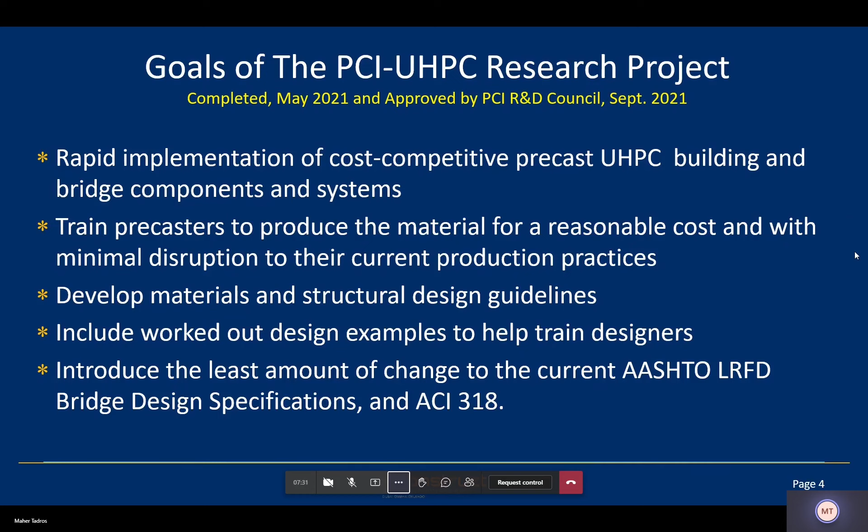We wanted to develop materials and structural design guides for people who want to mix their own UHPC and design with it. The report includes worked out design examples to help train the designers. The whole idea is to introduce the least amount of change to existing codes, whether it's AASHTO, ACI, or in your case, the Canadian codes.

So what is PCI UHPC? We identified it with compressive strength and what we call tensile properties. Compressive strength at service is 120 MPa. At pre-stress release, because our focus is on pre-tension members, at release of the pre-tensioning force it's 70 MPa. We recommend this, especially for bridges, but we don't insist on it. It's not a requirement; the requirement is to define our UHPC as 120 MPa at service strength.

For tensile properties, we go a little bit further because that's the most important set of properties. Tensile, not compression. Compression is easy to talk about because that's what you're used to doing. Tensile properties are the most important, and they are important because we have fibers in the mix.

So minimum, all based on the bending test for ASTM, with a minimum cracking stress of 10 MPa, minimum peak stress of 14 MPa, and then we have strain hardening to make sure that once the specimen cracks, the stress continues to go up, the load continues to go up. That's strain hardening.

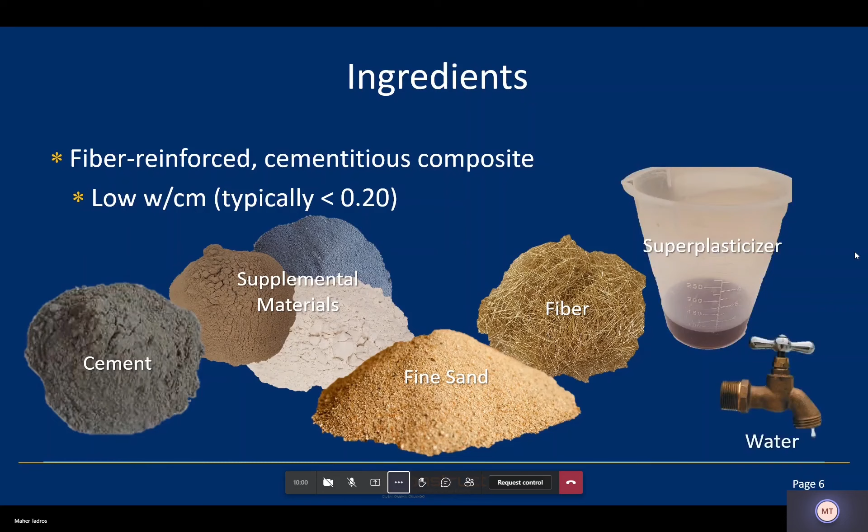We use fibers. We don't insist on the very fine 0.2 millimeter by 12 millimeter or 20 millimeter, very tiny microfibers that are black steel but coated with brass. If somebody has other fibers that will give us the properties, they can use them. Of course, the chemicals that are needed to make it flowable, and good, clean tap water.

Split cylinder test has existed. And then there is a new testing program called double punch test that I think started in Spain, and Florida DOT is interested in, and others are interested.

So the reason we chose the flexural prism test is that there is a standard for it. Everybody knows how to test a prism in flexure.

Here, it's a little bit more complicated because we need to get a load deflection diagram, not just load, not just the peak load. But it is something that people can use with their compression machines or some form of compression machine and test. And that's very important. It needs to be simple and it needs to have a standard.

The direct tension test, Dr. Graybeal has been trying for years now to get it introduced to ASTM, and he has been turned down. And now he has taken the route of trying to get a standard approved by FHWA or by AASHTO, and that is in process.

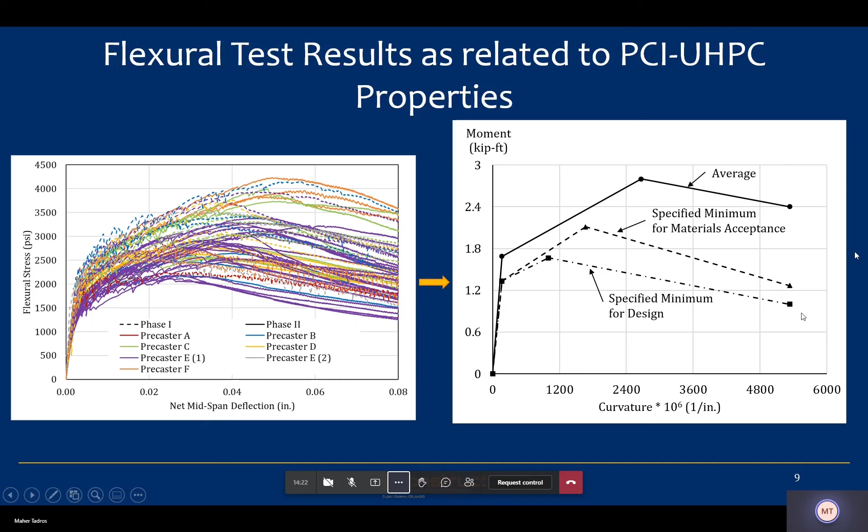The good news is that the average is relatively high of these tests. The minimum specified standard is what we use to accept the material as meeting the PCI UHPC requirements. And in design, we go even further than that, and we use the cracking stress, 10 MPa, and 14 MPa as the maximum that we can allow in design, and then the ductility, which doesn't enter into our design, but it's required.

So people will say, how do I be sure that my material that I'm mixing in my plant is satisfactory? What we're basically using is the ACI, and I am sure that the Canadian code has something similar, and that's to mix a number of tests and to create averages and standard deviations, and based on the number of tests, you decide what you would design your mix for.

Now, this is the important one, because that's what you do on a project by project basis. Acceptance testing has to be simple, and it has to be within the means of the precaster or the precaster's testing lab nearby. You cannot ship it to a university 200 kilometers away and expect convenient results, because sometimes you need to do the prism testing in 1 day, 3 days, 4 days. So it needs to be convenient and readily available.

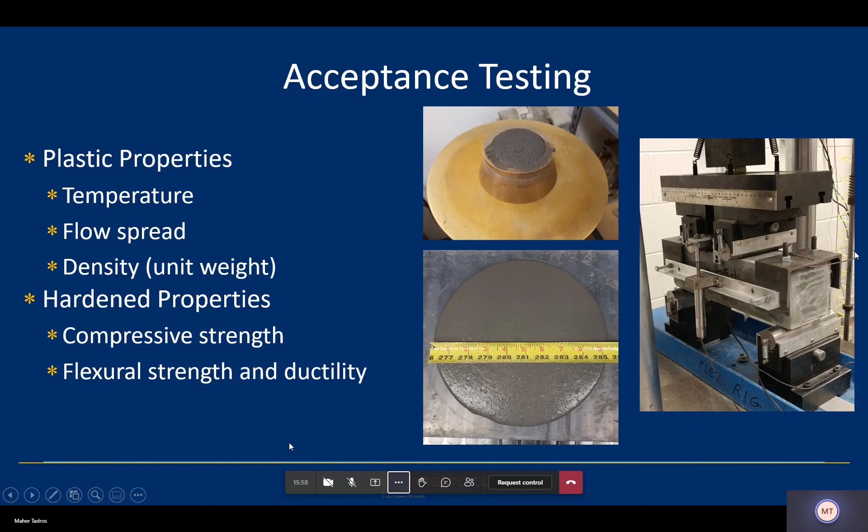So the picture on the right is the prism test. That's probably the most difficult of all. There's also a cylinder test, very simple and convenient, but you have to grind the ends to get good results. And for the fresh concrete, we have to have a flowable mix. If we don't have a flowable mix, we would have trouble filling the molds.

So the goals for production: it has to be practical to implement, it has to be cost competitive, and the precasters will need to tell us what works for them. We did develop guidelines in the report, but a lot of the precasters have their own way of placing the concrete, and we need to be open-minded and responsive to their expertise and their needs.

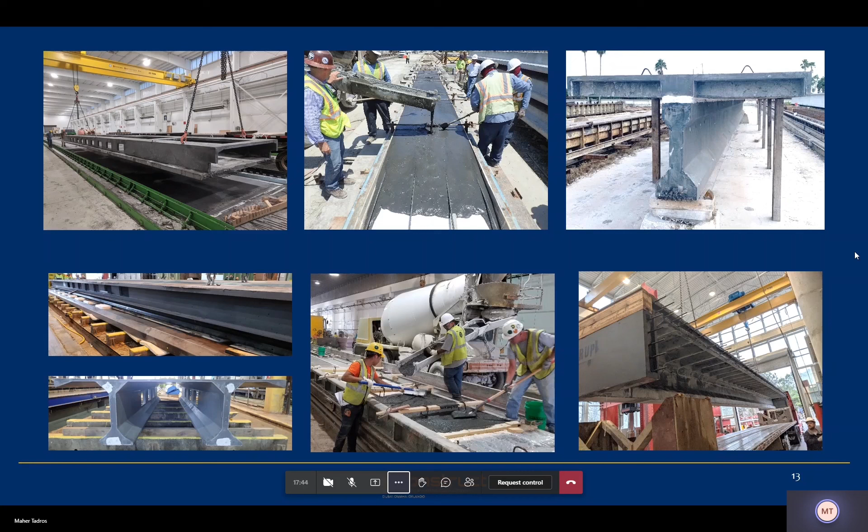The one on the top right is a composite of UHPC I-beam with UHPC deck, ribbed slab deck. The bottom left is a variation of the one on the top left. The middle is a variation of the one on the top. And the bottom right one is my favorite, because that was made by FACA in Toronto, near Toronto, and shipped to NC State University, North Carolina State University for testing. It's a full-scale test, and I'll talk some more about it.

Okay, this is my message. We cannot have cost-competitive UHPC without structural optimization. So this is a great time for structural engineers. Most of the work that has been done around the world ignored that second half of the package. Everybody is focusing on how to mix and how to get the highest possible strength. But unless you know how to use it in a real structure, then you're missing the rest of the story. So structural optimization is the key.

In our mind, we have 3 criteria for structural optimization: it has to be simple, it has to be conservative, and it has to be cost competitive - and I mean cost competitive on a first cost basis. These are very hefty goals, but we strived very much to try to achieve them, especially when we talk about conservative and cost competitive, there's a clash there. Some people say you cannot have all three conditions - pick two. No, we're picking all three.

And I'm sure just about everybody knows Steve Jobs and Sir Richard Branson. Both have the same message. Steve Jobs was a little bit more tactful and diplomatic in telling people that you start with something, it starts out very complicated, but you keep working on it and you can peel off the onion until you get a very elegant solution. Richard Branson is saying you're stupid if you don't do a simple design. My message is that simple is hard. A lot of people can come up with differential equations and very, very complicated solutions. I think that's kind of hiding the real simple solution that everybody should strive for.

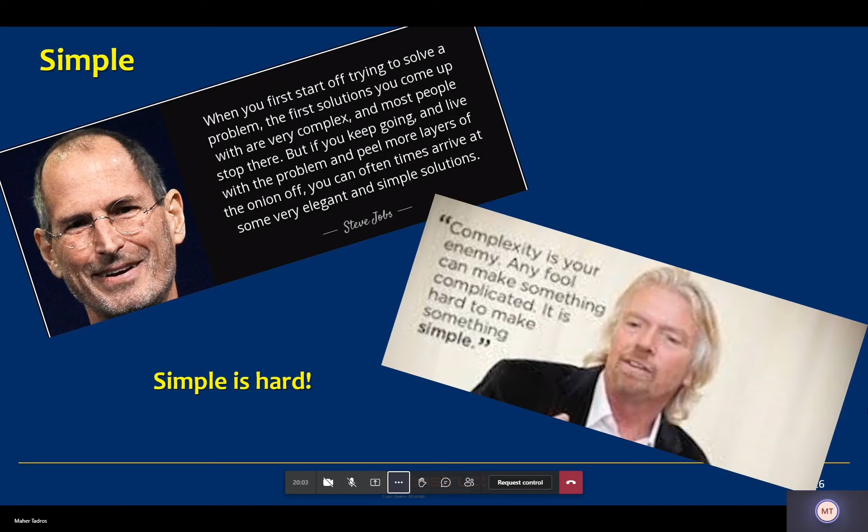So cost effective - we don't want to have a cost-effective cross-section shape. Take the I-beam, reduce the web width, and say that's going to be my optimization. That will never work. You need to take a bridge or a building and find where you can introduce UHPC in the most suitable, convenient way.

For example, in the state of Minnesota, they use cast-in-place haunch post-tension slabs. I don't know about Ontario or other provinces in Canada, but the cast-in-place haunch post-tension slabs in Minnesota and Kansas are quite popular. You need to take that whole bridge deck and replace it with a 550 millimeter precast UHPC box slab.

It will give you the deck immediately. It will not be interrupting the population around the bridge. It's good for accelerated bridge construction. So that's on a first cost basis, and that's what we should, unfortunately, all try to do.

Because we all do the bidding and the lowest bidder gets the job. But there are also a lot of bonuses, a lot of additional benefits. A study in Australia shows that the expected life is more like 340 years instead of 75 years. It's good for the environment because you use lower volumes of materials. It reduces shipping costs, it reduces foundation costs. And it is safe because sometimes you have a longer span without shoring.

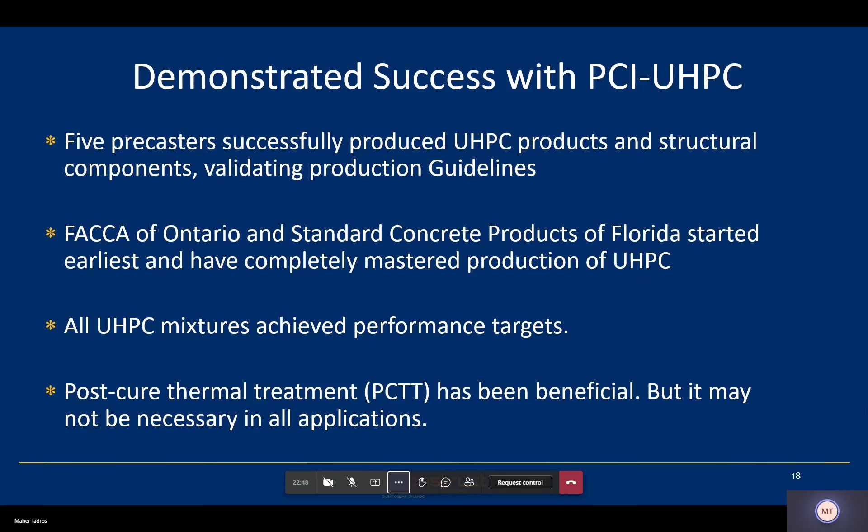So as engineers, the design is simpler, the detailing is simpler, the precaster benefits the same way. Although the base price of the material is high, there are additional benefits.

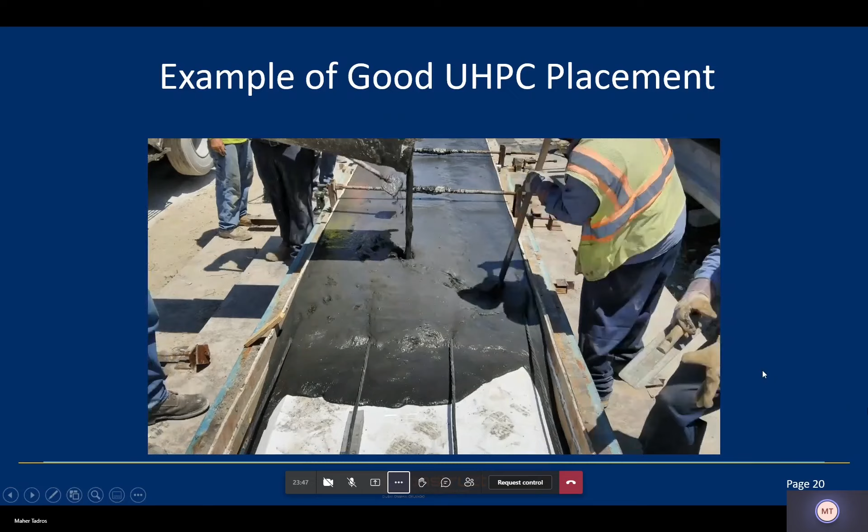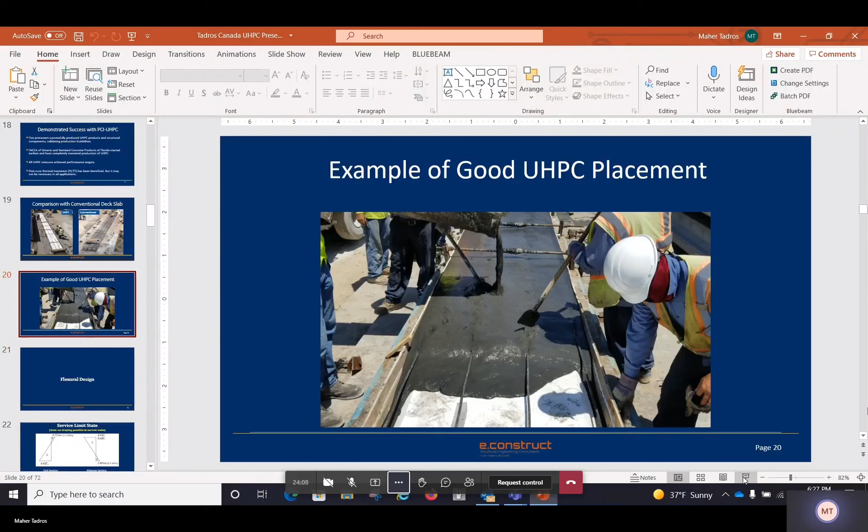I'm going to show this slide that gives you the flowability of the mix. I did it too quick. As you could tell here, it is very flowable.

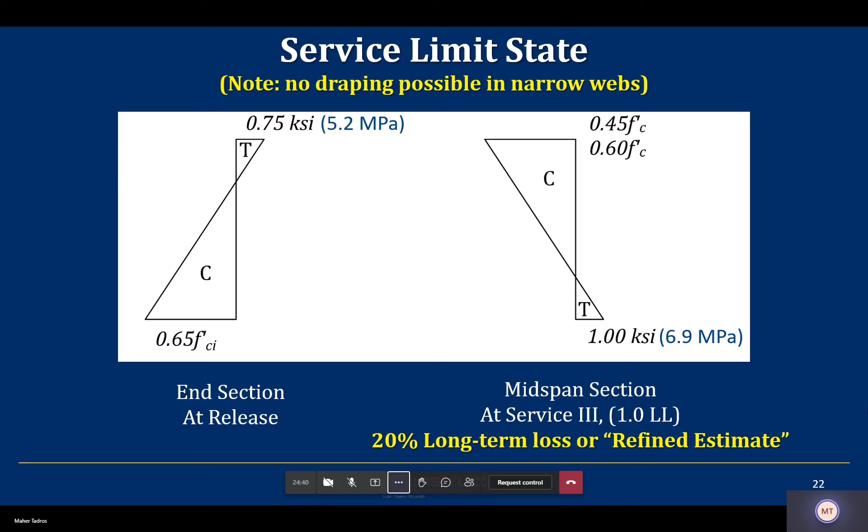Now we talk about flexural design. Everybody knows how to do service limit state, no issue. You need to use the creep and shrinkage coefficients for this material, determine pre-stress loss, and calculate using MY over I. No issues.

Flexural strength is a little bit more complicated. I will first talk about flexural strength with fibers, and I'll talk about what happens if you ignore fibers. If you have pre-stressing in a pre-stressed member, the main tension element is actually the strands, not the fibers. So the strain diagram follows plane sections remain plane. The stress diagram before cracking is straight lines, triangles. After the product cracks, the strain climbs up.

You still have a triangle for compression, but then you have a triangle for tension just a little bit. Then it becomes uniform all the way down to what we set as the acceptable ultimate strain in tension, which is 5,000 microstrains. Beyond that, the section still works, but we're not going to give credit to the fibers for any tensile capacity. This diagram, stage 2, is probably the one that's used the most until you get to the very end, when the strain at the top is 0.003, or for you in Canada, 0.0035.

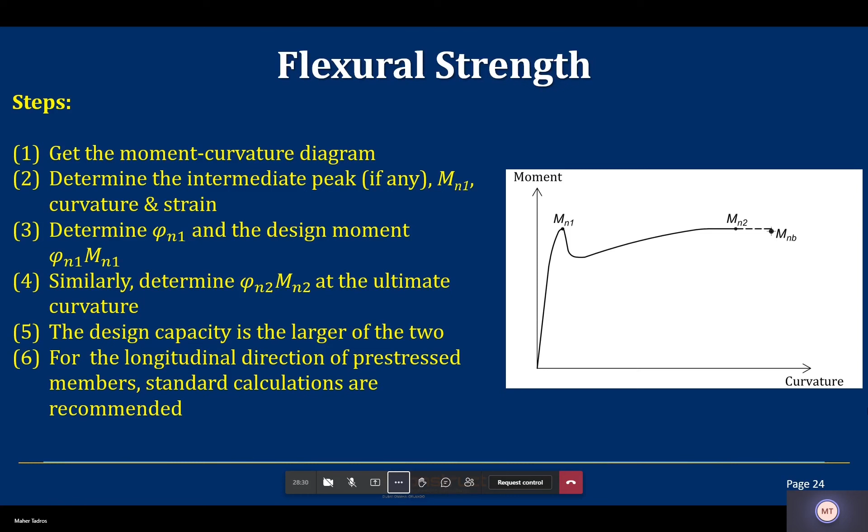But item number 6 here, for the longitudinal direction of pre-stressed members, which is the most important check, you can ignore the fibers, meaning you can use whatever computer program you have at this time. Let's take an example.

Now, close to 0.005, but the trick here is that he thinks you cannot go beyond this, which is the maximum strain in tension for the concrete with fibers. To me, that's a severe restriction, because when you do this, the stress in the strand is even less than the yield point. So in all of the work we've been doing for 50 or 60 years, we will never achieve the ultimate strength of the strand, which to me appears to be a waste.

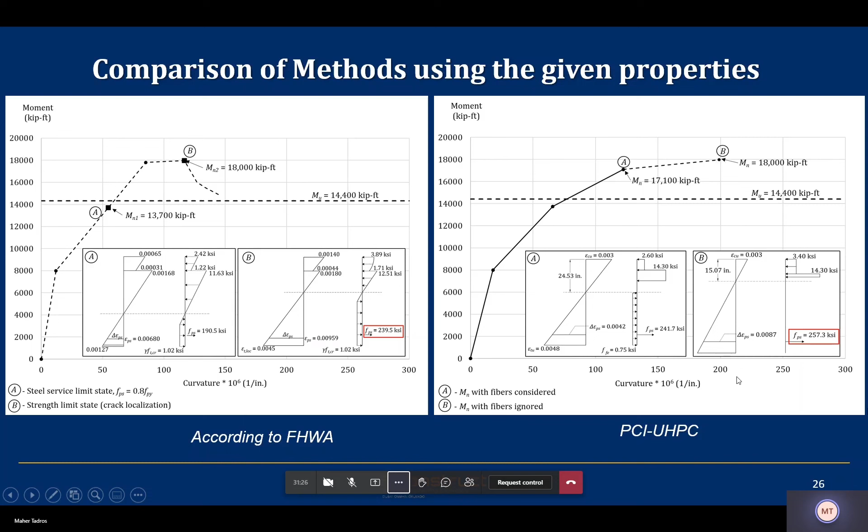So as a summary, this is a very important slide. If you use the FHWA recommendations, use the dashed line, and it drops - I don't know how it drops. It kind of doesn't make any sense.

If you use the PCI recommendations with the strands he has, which are 0.7-inch strands, it still continues to go up until ultimate, and it gives you about the same peak, but at a later curvature, later strain, and it's not needed. So if you take the whole section, and instead of 0.7-inch strands, you reduce it to 0.6-inch strands, from 17.8 millimeters to 15.2 millimeters, you still get the capacity you need - that's 2/3 of the pre-stress required for the section.

I would say thank God for FACCA. They approached us even before the PCI project started - that's how progressive they have been. They said, we want to have a modified NU beam, what can you choose for us? And they created a project, and we came up with what we call the decked I-beam.

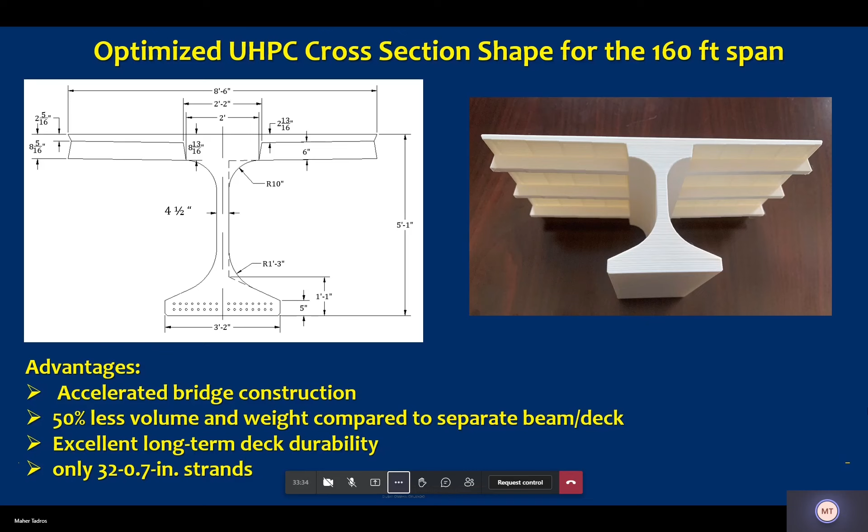So if you take the example run by FHWA, and run it again using the PCI method, and run the same loads one-third the time using the PCI UHPC with the decked I-beam, you can tell here you only need 32 strands, you need zero stirrups, and it's very fast construction. So you save a lot on concrete, you save a lot on strand, you simplify production, and that's how you get the cost effectiveness. So we've done a whole bunch of tests using products.

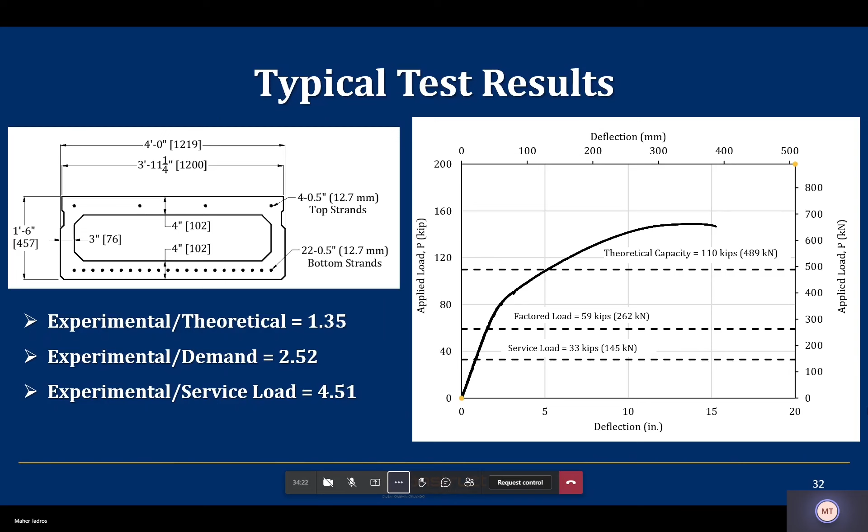And in all of the tests, we far exceeded the design capacity.

Very quickly here, development lengths, we're piggybacking on what Dr. Graybeal developed, which is a transfer length of 20 strand diameters, development length of 40 strand diameters. Bars, 8 to 10 bar diameters.

For vertical shear, we're sold on what Canada does, we're sold on what AASHTO does, thanks to Mike Collins and his associates at University of Toronto. He led the way back in the 90s, and we're very glad for that.

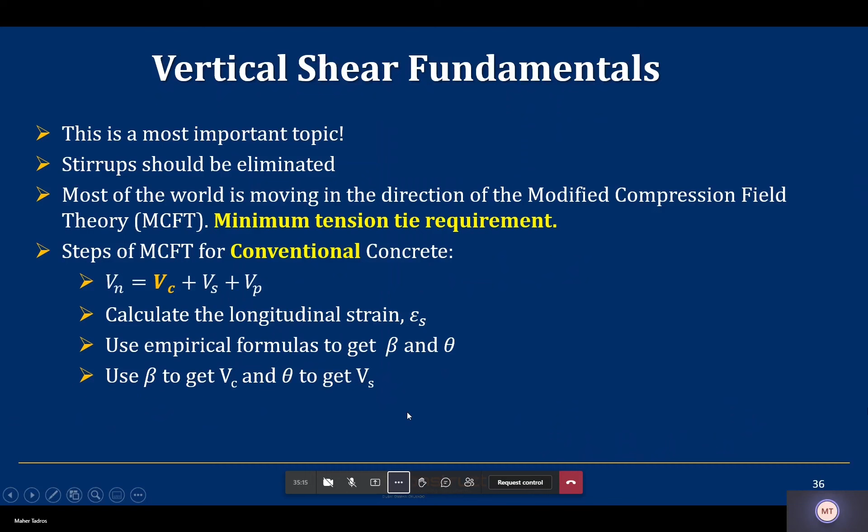So for conventional concrete, you just get the strain, the flexural strain, and from it you calculate beta and theta values that are used to calculate V sub C and V sub S. If you're doing UHPC, all the change you make is take VC out and replace it with VCF, representing concrete mixed with fibers. Because of the minimum properties we have, this comes to 1 KSI or 7 MPa. Very, very simple: 1 KSI times bV times dV cotangent theta. That's all you need.

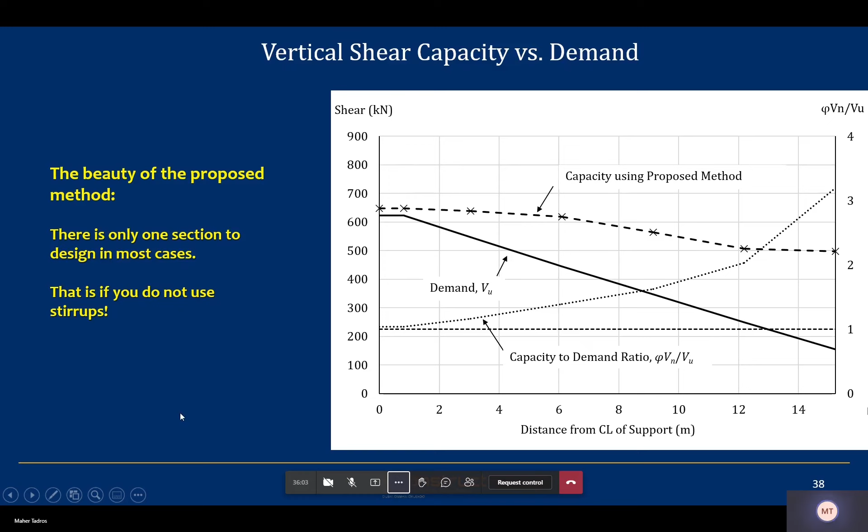Again, one good benefit of using UHPC: if you don't use stirrups, you only check one section, because the capacity is closest to the demand only at the end, and then they spread out after that. If you don't have stirrups, then that's all you check, and that's all you detail - no stirrups.

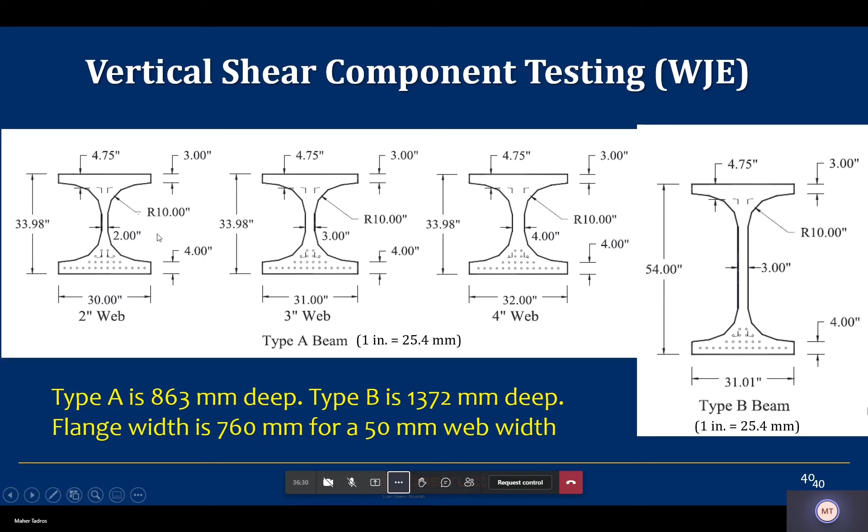And it's very important that we insist on the tension tie needed to make this system work. We tested a whole bunch of specimens in shear. WJE tested what we call coupon tests or component tests using I-beams that we designed specifically for the project. You can tell we have very large fillets, and we like that because we like the concrete to flow through.

We also tested a whole bunch of products, including the FACCA I-beam at NC State University and some building products, as you can see here. In all cases, you will see a whole lot of cracks, and then finally one crack dominates.

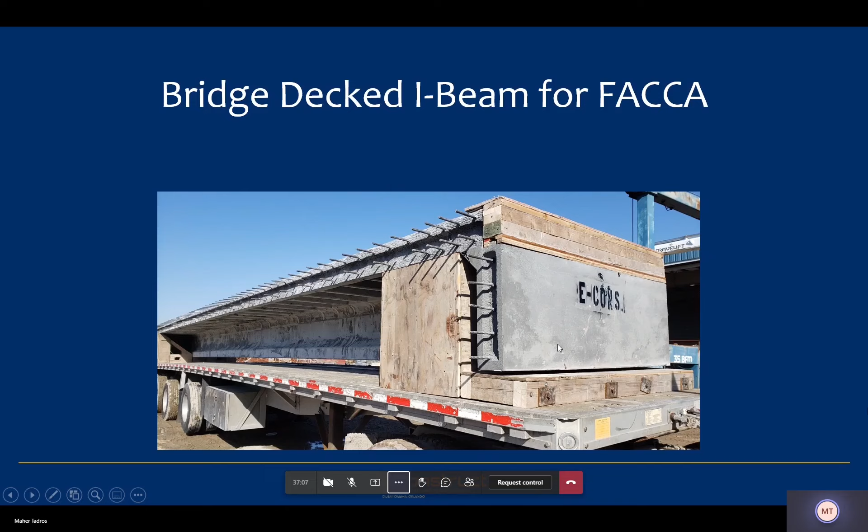This is the FACCA decked I-beam. They labeled one end as Econstruct - that's the company, my company name. That's the end that has no stirrups. The other one has stirrups, I believe, as per Ontario Ministry of Transport requirements.

So the one that had - the one that had, I'm sorry, go ahead Philip. The one that had, go ahead. No, it's not me, somebody else.

Okay, the one that had stirrups did give high capacity, relatively high capacity, but at near ultimate there were vertical cracks that reflected the locations of the stirrups. So the stirrups disrupted the flow of the fibers. And if we have no stirrups, we still have very high capacity, so I don't know if there is a justification for putting the stirrups. I would rather make the web wider and get rid of the stirrups than make the web narrower and impose putting stirrups there.

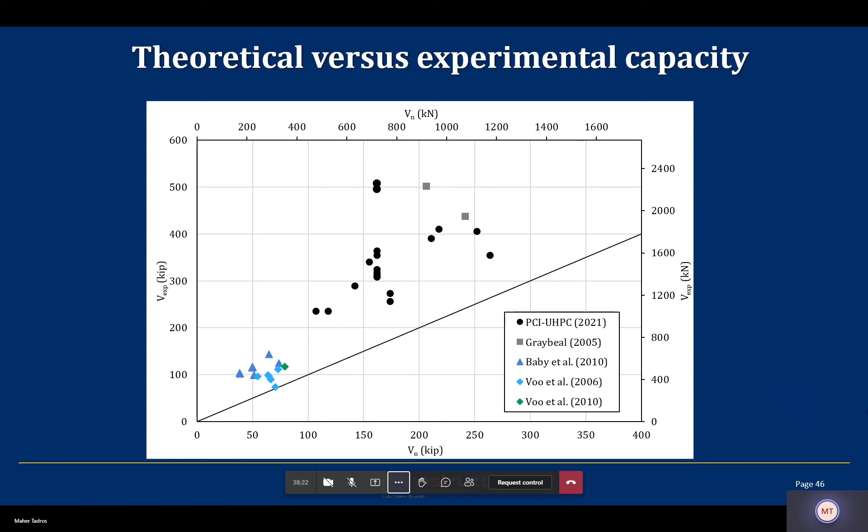This picture still gives you the experimental capacity versus the theoretical capacity, and in all cases we are quite a bit higher. Actually, we have a very large margin of safety in addition to the load factors.

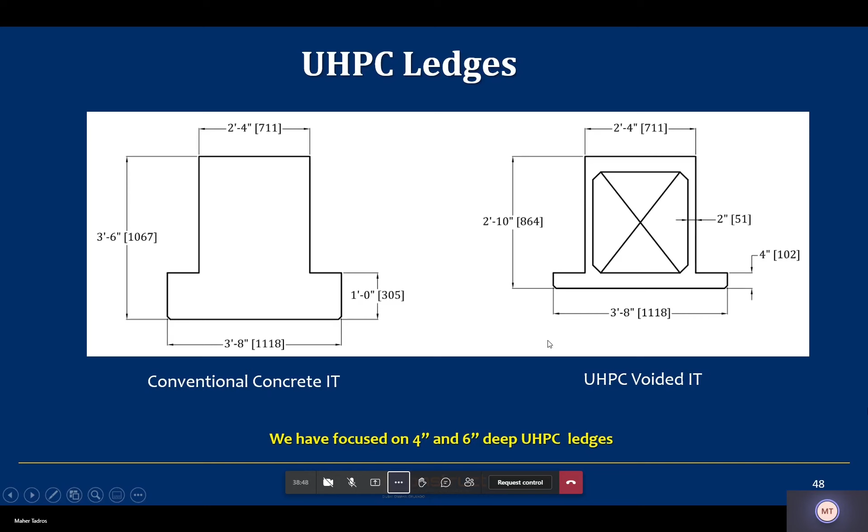We also tackled pre-stress loss, interface shear, punching shear, corbels and ledges, end zone bursting stresses, reinforcement creep and shrinkage, camber, and deflection. This gives you an idea about an inverted T that's very popular in buildings and how it can be converted to UHPC - very amazing, very interesting. And we did full-scale testing, and we're very confident in our recommendations.

And that's all in the report. For applications, obviously a lot of people would love to see architectural UHPC, and that's moving forward.

Again, coming back, decked I-beam - I am sold on that. Either the decked I-beam or the box slab are very, very efficient products to use.

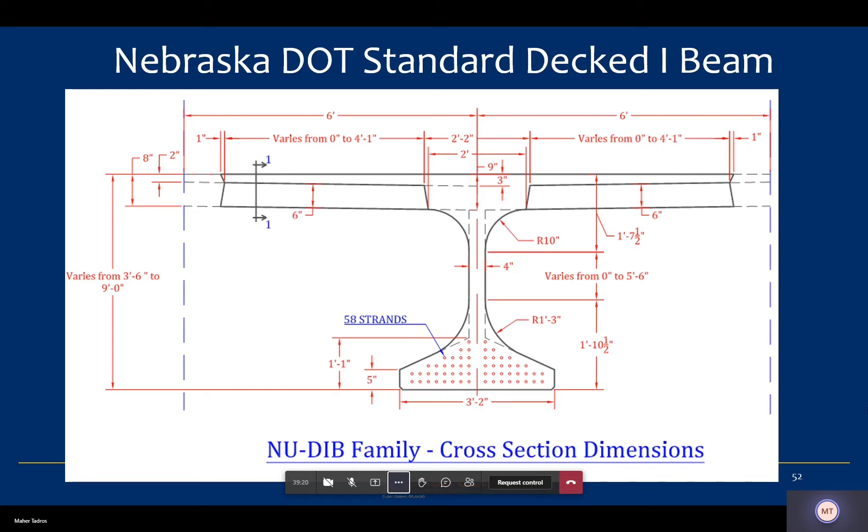We're also doing sheet piling under contract with Florida DOT. This is supposed to be a 1 foot, 12-inch, 300 millimeter solid sheet pile. We're changing it to a U-shape.

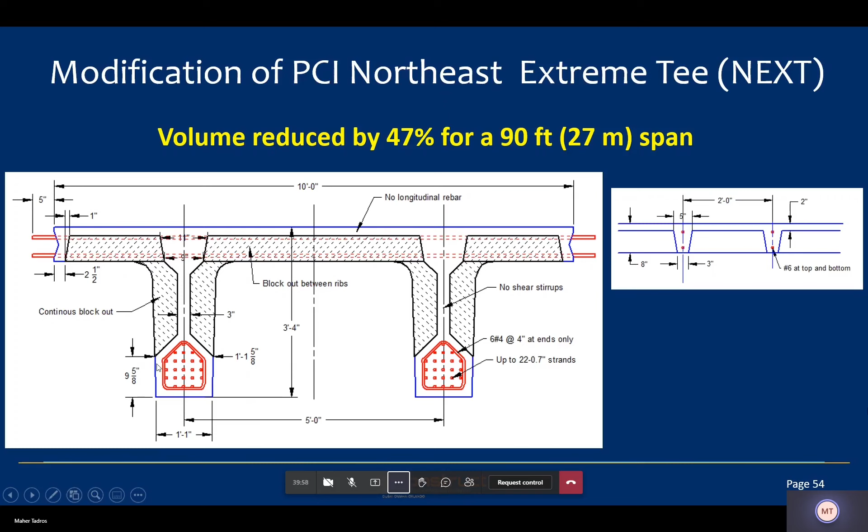We published in Aspire magazine an idea of converting the popular Next beam - for Northeast Extreme T - to a much more efficient UHPC, again with zero reinforcement except confinement at the end and bars in the transverse direction. This product is also excellent, and it's good for shallow structural depths. If you're replacing a 4-span steel bridge with a 2-span overpass at the same depth, you can do this and get away with it.

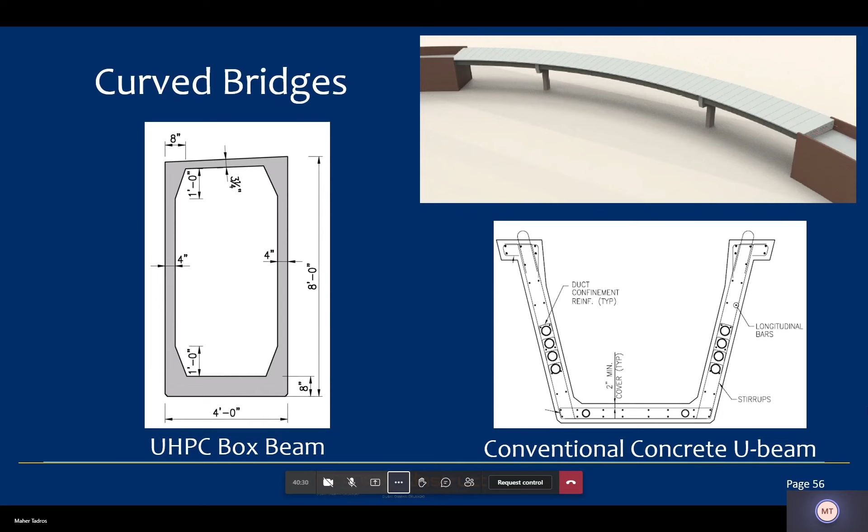We're also working on curved bridges, and in the PCI journal, in the March-April issue, look for a paper on that represents a concept using UHPC for curved bridges. Piling - it could be an I shape, it could be an octagonal shape with a void inside, formed with cardboard.

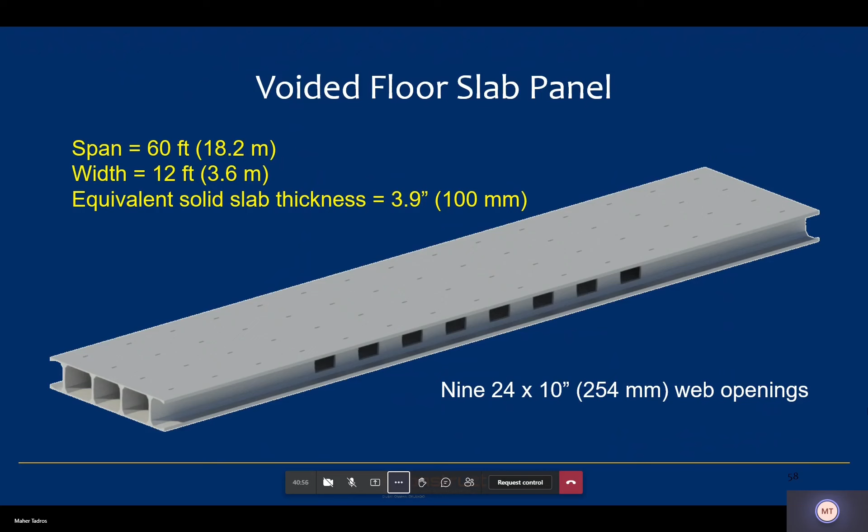Voided slab for residential construction, you can span 20 meters, 60 to 70 feet easily, no supports. Excellent if you have parking underneath. This project is ongoing, production is on the way.

We converted a steel framing system at the top with a column in the middle, 36-foot span, to a clear span of 72 feet, with voids in the beam. So you can pass utilities and create all kinds of options. We replaced all this steel framing with hollow core sitting on a box beam. And that's how the box beam looks.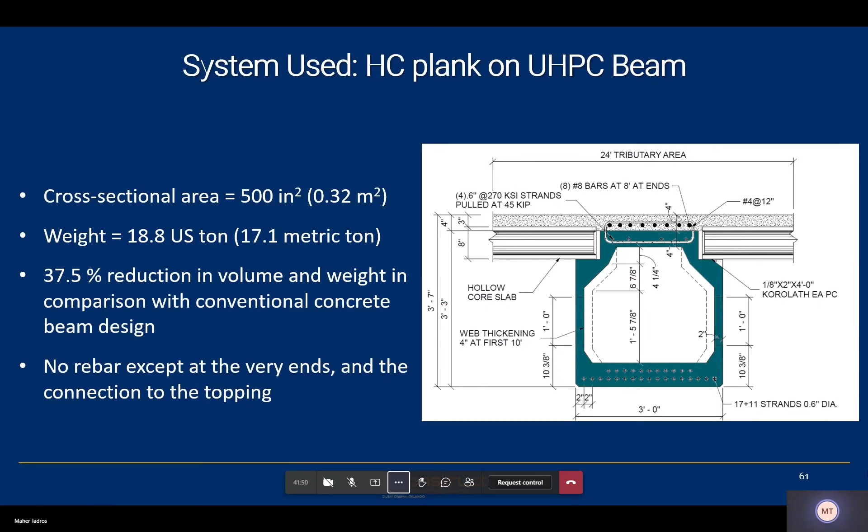Saved quite a bit of materials. These beams are in production at this time. It's a 9-story building. Another example that I'll give real quick.

I don't know about Toronto, but I'm sure there are parts of Canada, because I designed some of them back in the 70s when I was in Calgary. You have condos, wood condos sitting on concrete podium floors. But at that time, I used post-tensioning.

Here, we're using precast, but you could tell it's very messy. There's a column in the middle, so cars that go in underneath would have to navigate through these columns. There's hollow core, there's rectangular beams where you have load-bearing walls, and there's an inverted T-beam. So it is quite involved. And this is the floor where you do the parking.

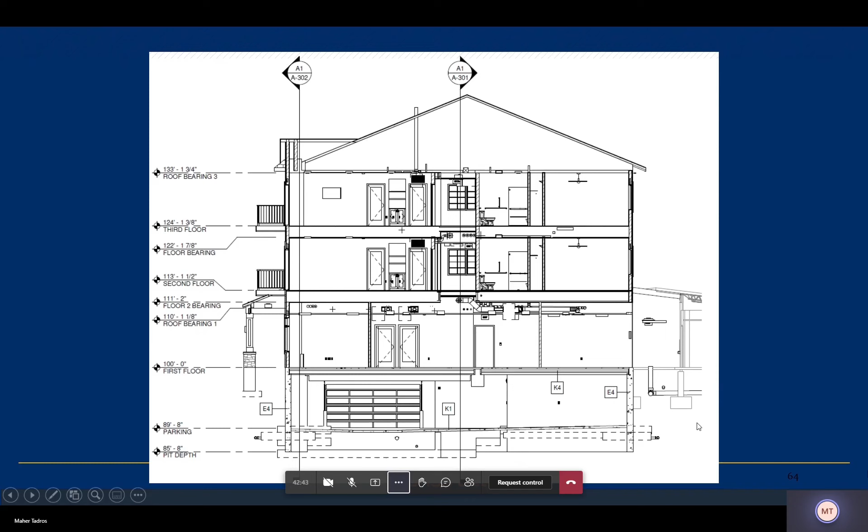And these are the products: rectangular beams, hollow core with topping, rectangular beam when you have heavy load, otherwise it's hollow core, which is cheaper. And then the inverted T supports hollow core on one side and rectangular beam on the other side.

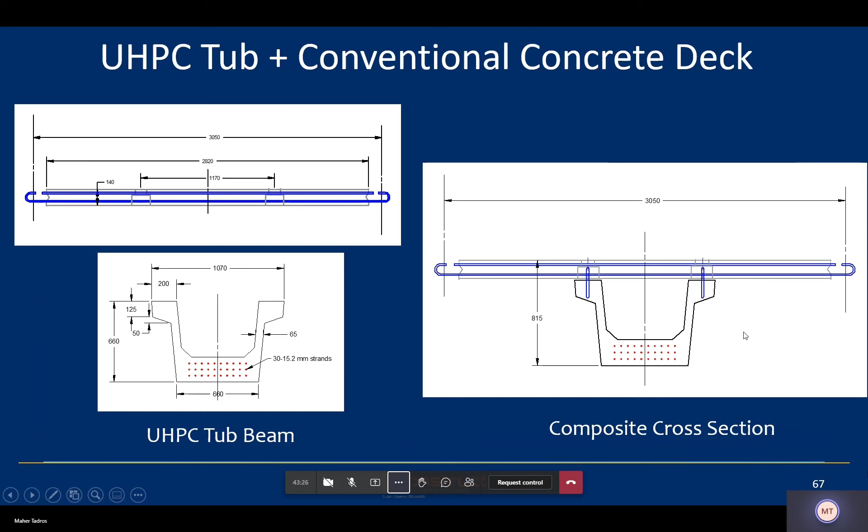We managed to change all of that with only one product that spans end to end. The product looks like this: you have a UHPC U-beam, and you have conventional concrete deck on top of it. So the UHPC is only limited to the U-beam. That's all we need. Very shallow, very attractive, and it clears spans.

So we changed from 105 pieces to only 14 pieces. That's where you get the possibility. Imagine the possibility—14 pieces, you actually save money.

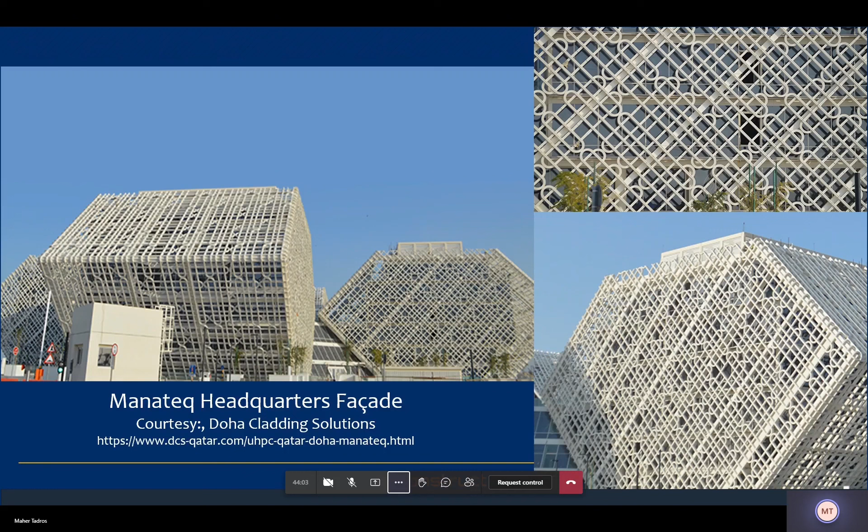Of course, everybody loves architectural applications. Our sister company in Doha is very active with architectural UHPC for cladding. This is one of their projects, and obviously another one in the United Arab Emirates. There's a lot, and I know there are some projects in Canada that are quite attractive. I believe the library in Calgary is a very attractive project.

So can we wait? Should we wait until these turkeys make up their minds as to which design method? Please, no, don't. You already have enough information to do your design and to do it efficiently. The time is now. Don't wait. And this is my presentation.

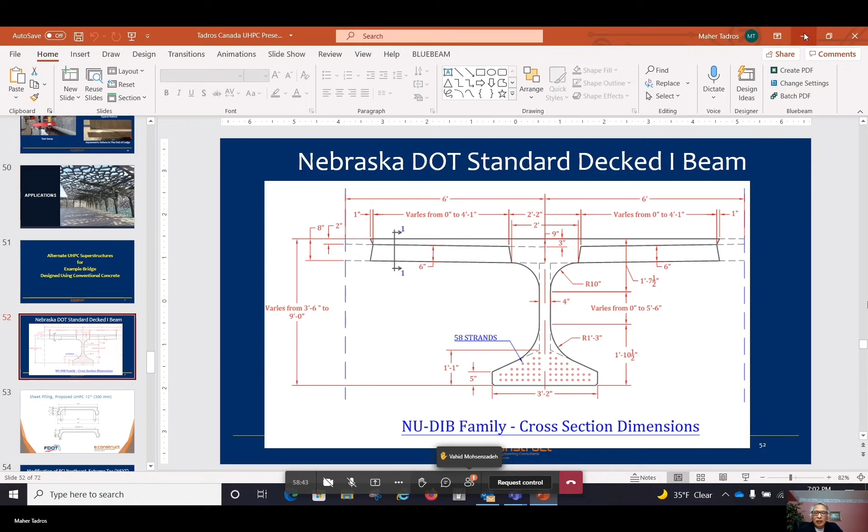Okay, I guess we are exactly on time. I would like to thank Dr. Tadros for these excellent presentations. I think in the audience we have people from clients like MTO, City of Toronto, and we will definitely consider those girders and UHPC in our structures. Thank you, Professor Tadros. Happy to help anytime - as I said before we started the meeting, I'm a Canadian. So you guys need to consider me one of you, definitely from Calgary, and colder than Toronto.

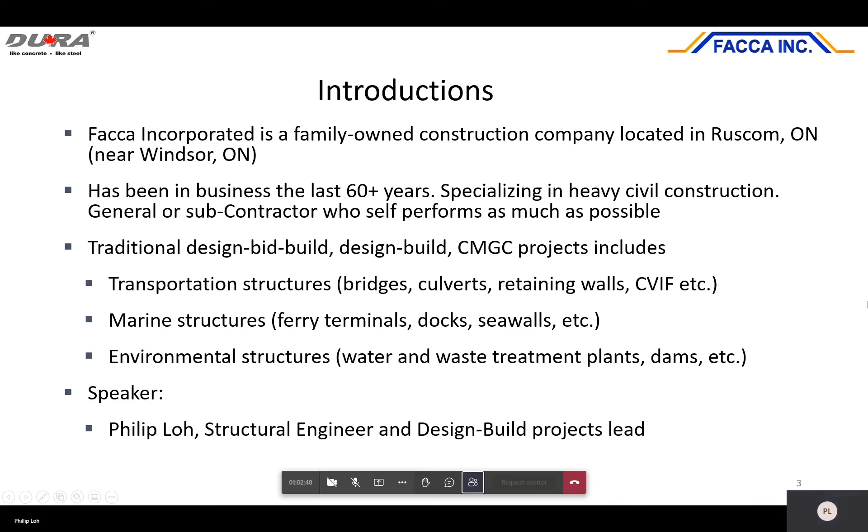Man, what happened? It doesn't want to move, right? Okay.

The Dura UHPC that we have - we formed a joint venture with Dura Malaysia to form Dura Concrete Canada, and this is a proven UHPC product. It has been used in many MTO contracts and meets CSA, MTO, and as you can see in the previous presentation, the PCI standards. So we are a precast facility, CPCI certified, and we use local Canadian and Ontario raw material as much as possible.

So the material properties for Dura - this is the CSA standard A23.1-19 material identity card. You can see the compressive strength here - the mean we tested is around 140 MPa, and the characteristic is around 130, in category 120. All the tensile strain characteristics are here.

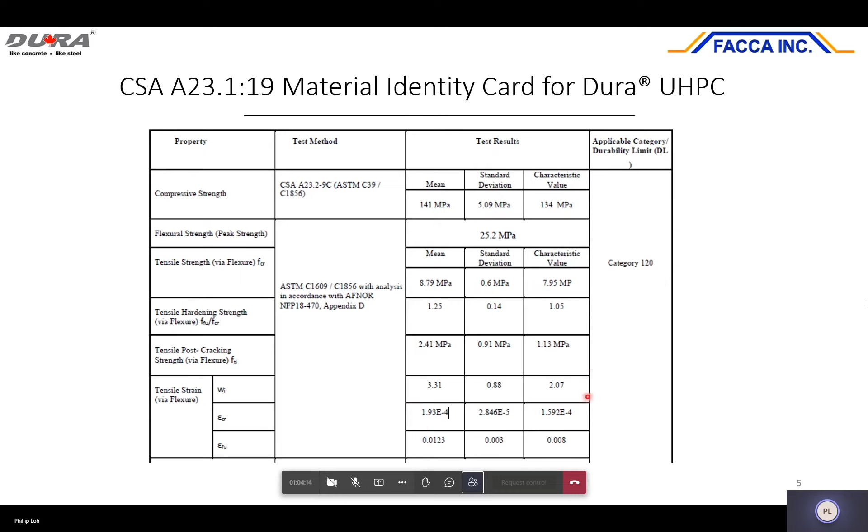Then for durability, as we mentioned, this is a very durable product, and some of the more important parameters we use is the RCP chloride ion penetration - we tested generally around 34 coulombs, which is less than 100 coulombs. Those are very, very good numbers.

So we did some testing last year for MTO for the DSM pre-qualification. Here is the mock-up sample casting - this is to simulate a closure joint between precast elements, with MTO here to witness the casting in our yard with this mock-up sample at a 2% slope.

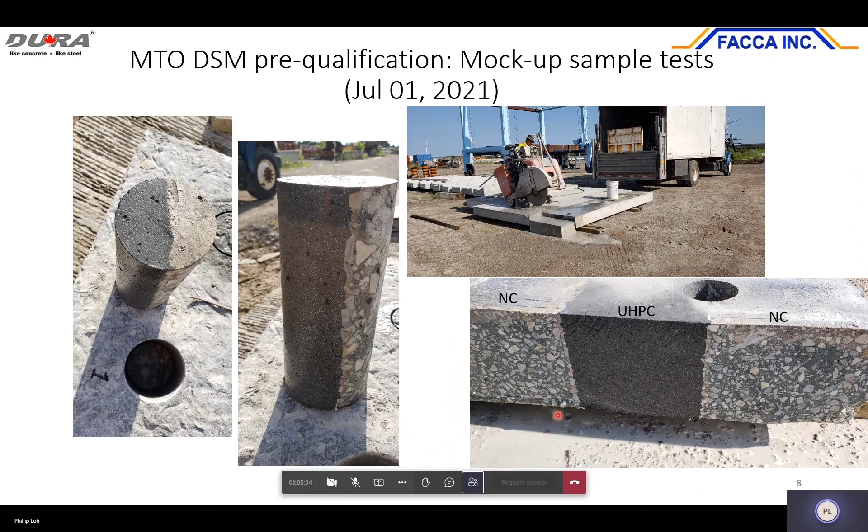Then 7 days later they came back and we did a coring through the joint. So there's a core - this is UHPC, and there's normal concrete, and the bond is just about perfect. We also saw cut through the joint, and you can see again the bond is really good.

MTO has also asked us to do a whole bunch of other tests. For DSM they have different parameters - the 28-day strength has to be 130 minimum instead of 120 according to CSA, so we ended up with 150 - they don't use characteristic strength, more the average. Then for tensile strength, again the RCP - MTO only requires less than 300, but we have very low numbers, 27. There's also linear shrinkage and freeze-thaw - 300 cycles and it's still 100%, so no change.

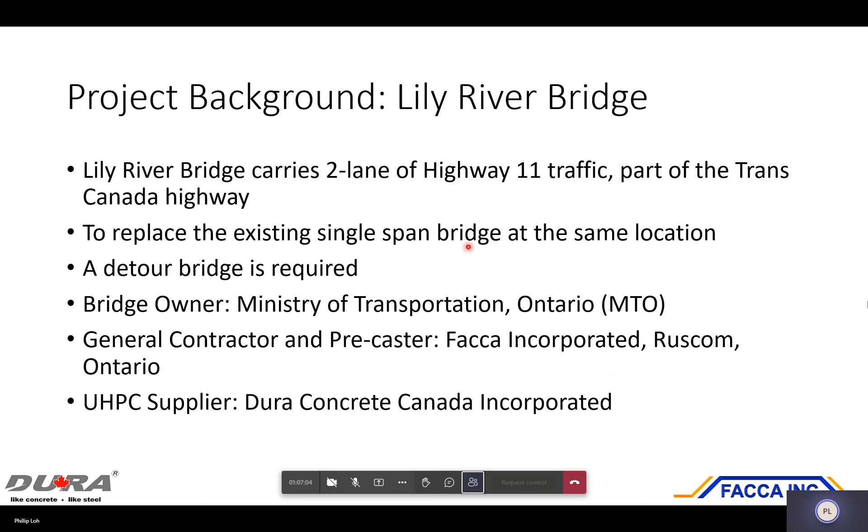The project is to replace the existing single-span bridge at the same location, and the consultant Stantec has required a detour bridge. The next slide shows the detour bridge, some distance from the existing bridge - this is toward Kapuskasing and this toward Moonbeam. This single lane detour bridge is controlled by temporary signals - it's one of those Bailey bridges.

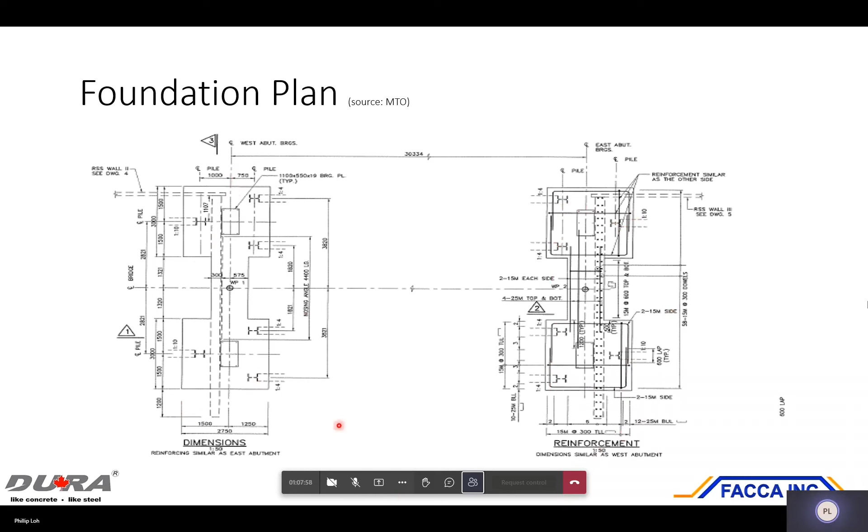For the foundation plans, we have the east abutment and west abutment. The design was 6 steel H-piles for each abutment. For one of the abutments, the west abutment, we have a change proposal to replace the steel H-piles with UHPC piles, while also maintaining the batter. We know that UHPC piles probably require fewer than 6 piles, but we decided to keep the same number of piles and keep the batter as well.

So this is the foundation design. The borehole logs here show bedrock at around 12 to 13 meters below grade. 13 meters is where the east abutment is, and 12 meters is the west abutment, which we are more interested in. It shows cobbles and boulders, so we have to fit the piles with pile driving shoes.

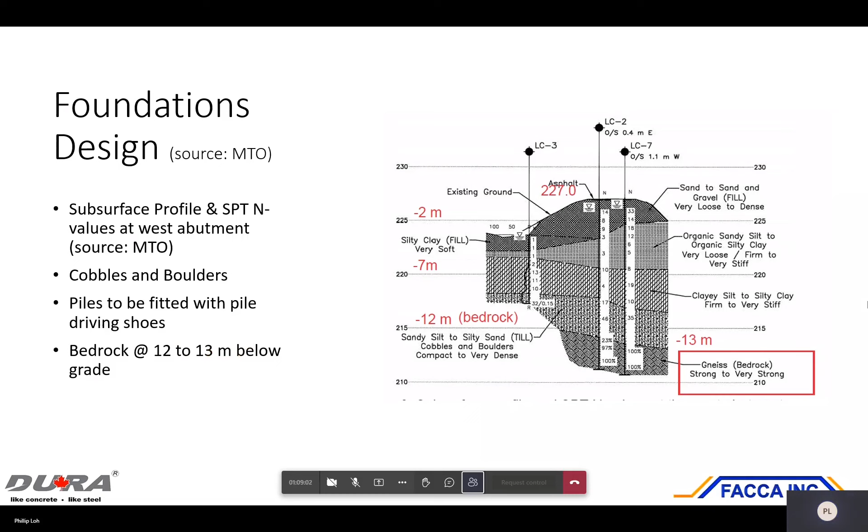Based on the IFC drawings, they said the pile had to be fitted with driving shoes. We didn't change that. Estimated pile length is 13.8 and 13.5 meters. That's why our stressing bed is just perfect - it was 15 meters, so we cast 15 meter piles to make sure they can actually reach the bedrock. And these are the serviceability limit states, axial resistance required per pile, and the ultimate limit states.

So this is the UHPC piles cross section that we have proposed. It's a pre-stressed, pre-cast UHPC pile. It's 300 by 300, H piles more or less, with 10 of these pre-stressing strands.

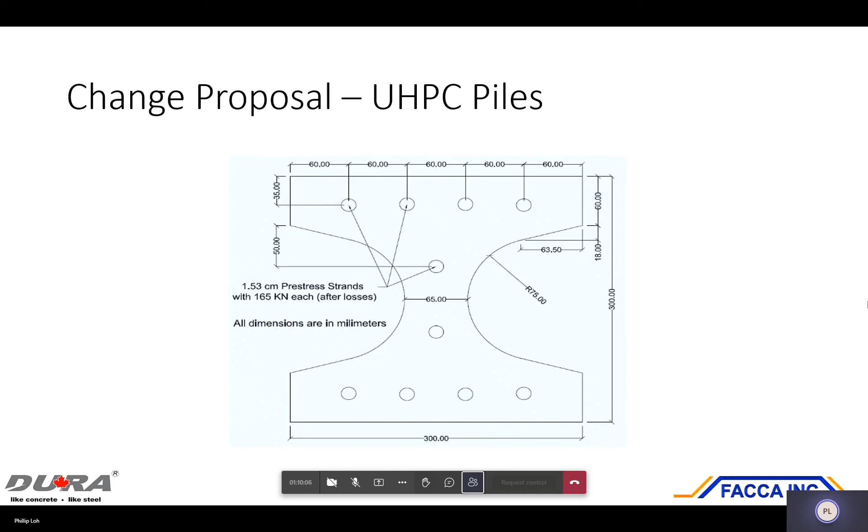So the UHPC H pile design - we had Dr. Sri Sritharan from Iowa State University and Dr. Kam Ng from Wyoming University, because they have done a few of these pile designs for the Iowa DOT and have actually used it on a couple of bridges. So we got their expertise on this one. They designed based on the CSA S6.

They require 100 MPa at the time of transfer, which is high, but that's what was required. So 150 MPa during service. Then the design load is the same as jacking stress, and they did - Dr. Ng is a geotechnical engineer, and he did all the WEAP analysis for us for the pile drivability, and it concluded that we need a geotechnical axial resistance of 900 kilonewtons, which is 2 times the ultimate limit states.

So we did some environmental impact assessment. Somebody asked just now about low carbon emission - yes.

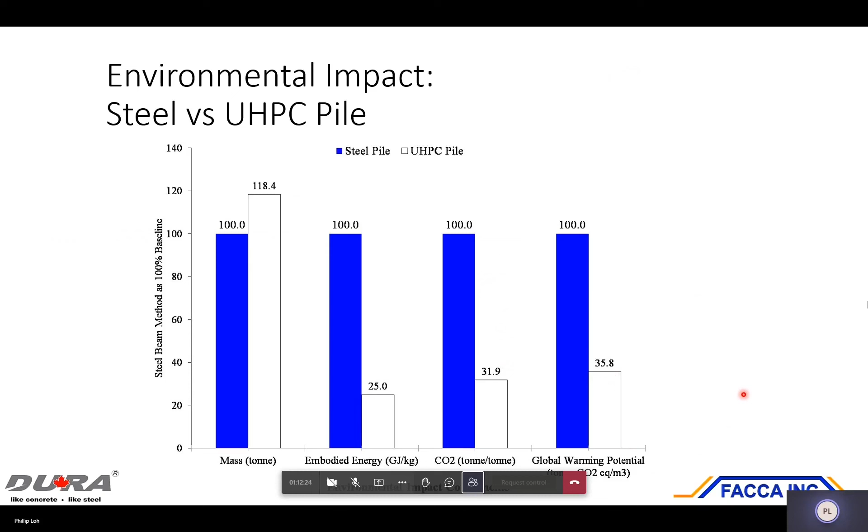We did the comparison between steel and UHPC piles. If you look at the mass, let's say 100 is the benchmark for steel piles. The UHPC pile is around 18% more weight because it's concrete, but the embodied energy to produce steel piles versus UHPC piles shows a drastic decrease from 100% to 25% - that's like a 75% reduction. The carbon dioxide emission, again, very good, reduced by almost 70%. So is the global warming potential. So UHPC piles definitely have environmental benefits.

So it is a 15-meter long precast pre-stressed UHPC pile fitted with pile driving shoes. So we're doing some QA QC testing here.

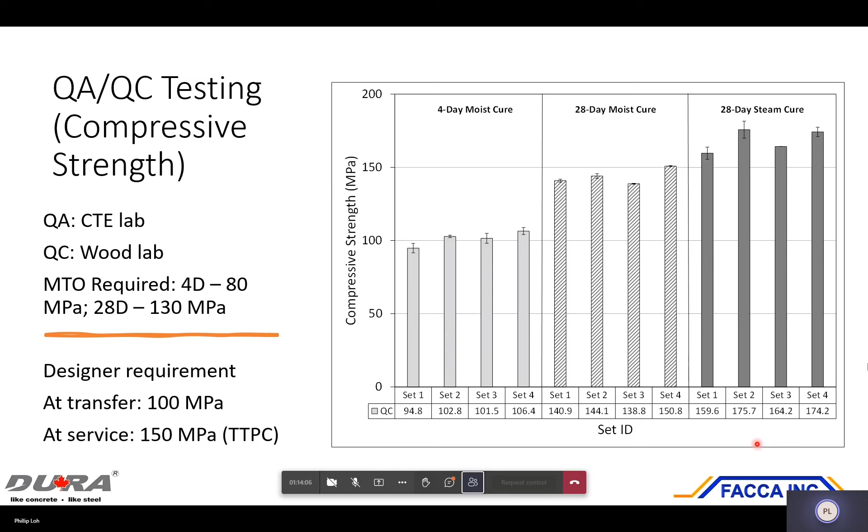QA obviously is done by a lab determined by MTO, and then we have our own lab from Wood, which is also MTO qualified. So we did this comparison here - a 4-day moist cure, 28 days, and then steam curing, because that's what the designer required - we had to have 150 MPa. With just a lab cure we're not quite at 150, but when we add the steam cure at 90 degrees centigrade for 2 days, it increased the strength.

And then we did the 4-point bending test - those were very good. MTO requires 15, we exceeded all that. The RCP - again MTO required 300 - we are all less than 100.

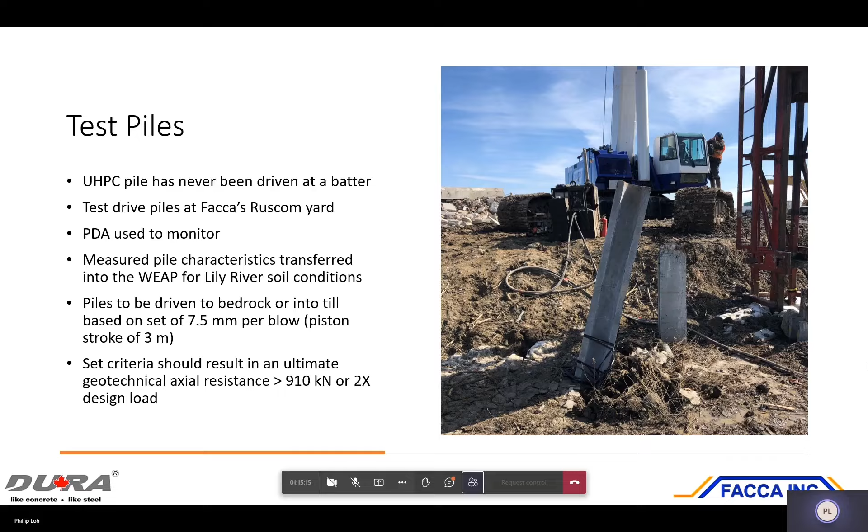We also did some test piles just behind our yard, using the foundation investigation information from a nearby bridge, the French Line underpass at exit 40 on Highway 401, near our yard. We had our geotechnical consultant come out and do all the PDA testing, just to make sure this works. We drove it vertically and at the batter, and they gave us a set criteria to be used at the Lily River Bridge. Then we started construction and drove the piles.

We were told the piles would reach 13.8 meters to bedrock, but the concrete section had so much friction resistance that it didn't really reach that much. So our 15-meter piles still had quite a bit sticking up here, because we only drove them 6 to 8 meters for most of them. So we cut off the piles and cast the pile cap.

For the PDA results during construction, we had the CA consultant do all the PDA, and the pile set was at 8 to 9 meters below existing ground. So we have 15-meter piles, and some had like 7 meters sticking out. But for comparison, the steel H-piles were 13 meters below ground. So there is a benefit here with UHPC piles.

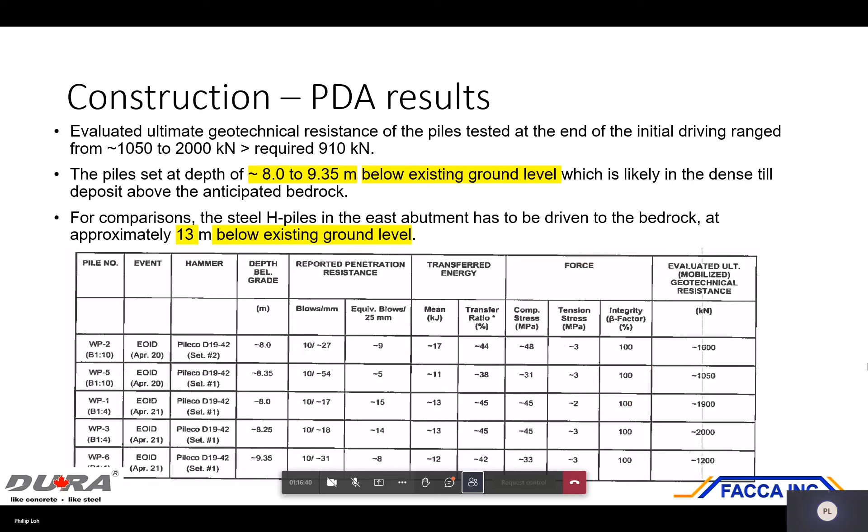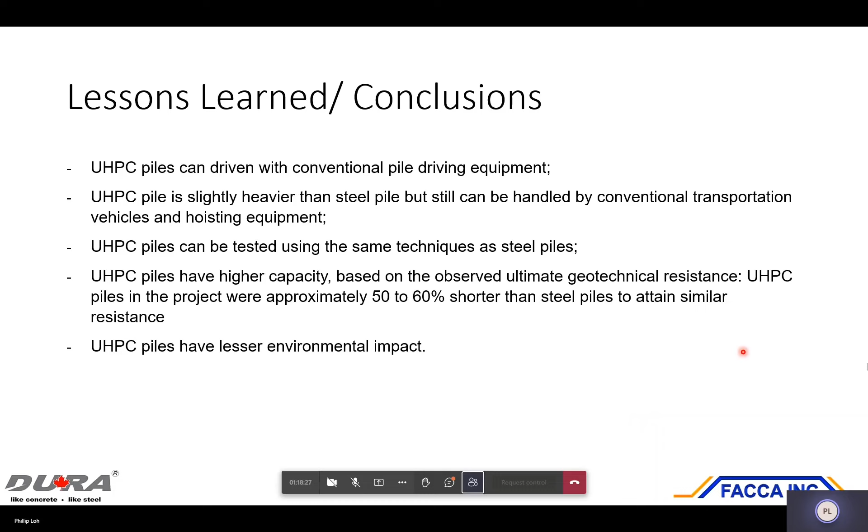So what are the lessons learned here? Conclusions: UHPC piles can be driven with conventional pile driving equipment. UHPC pile is slightly heavier, but can be handled by conventional transportation and hoisting equipment. They can be tested the same way as steel piles. And UHPC piles, as you can see, have higher capacity, so we need shorter UHPC piles than steel piles in this instance. Obviously, UHPC piles are more environmentally friendly.

We are going to do more research with University of Windsor, trying combined pile axial and bending tests, such as piles for integral abutments, and pile splicing. Because we are limited to 15 meters, if we want a 30-meter pile, we may need pile splicing, so we need to test that. And then we want to look at friction versus end-bearing piles.

There are other studies we are supporting, including Alabama University's PCI-sponsored pile studies. Also a UHPC consortium at Iowa State University has a pooled fund study, which I think is driven by Iowa DOT, so we are supporting part of that study too.

Acknowledgements: some of the UHPC pile formwork funding came from NSERC, and we want to acknowledge that. And of course MTO for approving our change proposal, and the designers and the Facca team. That's all I have. Thank you.

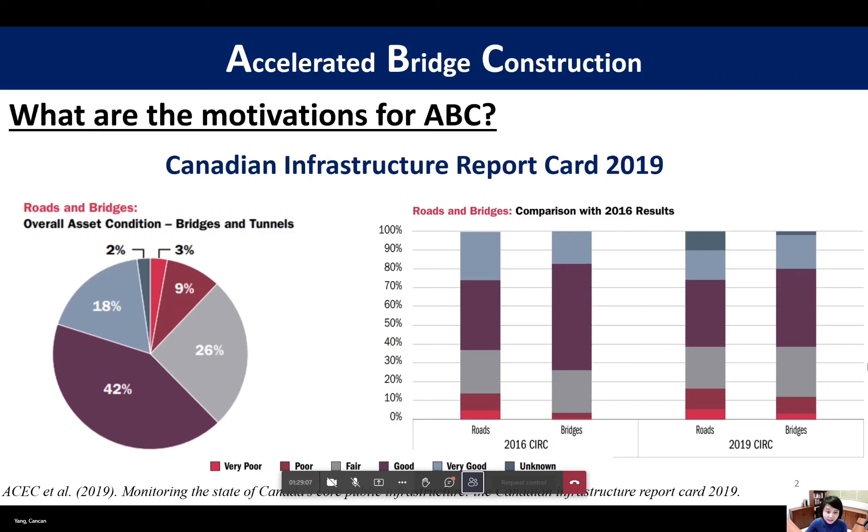Repairing or replacing these deteriorating bridges will cause significant traffic disruptions, mainly due to lane or road closures. That's why the need for adoption of ABC is greater than ever. Compared to conventional construction, ABC offers tremendous savings in construction time, which can effectively reduce transportation delays. Also, by limiting on-site construction activities, ABC will improve work zone safety, which can be beneficial for construction budget control and minimize environmental impact.

Absolutely, we can say that ABC is a more time efficient and sustainable construction method. PBES, prefabricated bridge elements and systems, have been recognized as an important technology of ABC. However, their application is limited in moderate to high seismic regions. So to facilitate the utilization of ABC in seismic regions, research needs to be done to address the seismic limitations of existing precast concrete systems.

Here I classify precast concrete bridge pier systems into two types. The first is the emulative pier, meaning it emulates cast-in-place construction. To resemble monolithic concrete behavior, we use special connectors such as grouted duct connections, mechanical bar splices, or pocket/socket connections. This can achieve very similar behavior to a monolithic pier, but the problem is it will develop permanent damage or residual displacement after an earthquake event. Also, the connection has to be carefully designed, otherwise ductility will be a big concern.

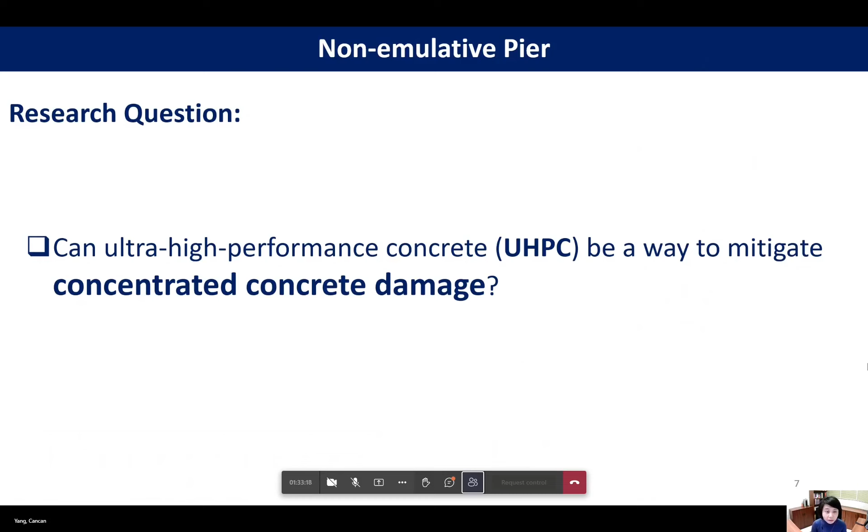Our research seeks to address this limitation. Specifically, we are trying to answer the following questions shown on this slide. We know UHPC has high compressive strength and sustained post-cracking tensile strength, and we want to see if UHPC can be a solution to mitigate concentrated concrete damage, which is a limitation in the non-emulative precast concrete pier system, or rocking concrete pier system.

Here we designed and fabricated 3 large-scale precast concrete pier specimens. Each specimen is composed of a precast concrete cap, 5 precast concrete column segments, and a precast concrete foundation, connected with unbonded post-tensioning strands. The 3 specimens have varying materials for the bottom segment. In specimen 1, the reference specimen, everything is built with normal concrete. In specimen 2, we used UHPC to replace the normal concrete just for the bottom segment. In specimen 3, we further removed all mild steel reinforcement from the UHPC segment to see whether it can still behave satisfactorily under simulated load.

All 3 specimens were put under reversed cyclic displacement controlled loading. Here are the test results. From these 3 pictures, you can see all 3 specimens behave like a rigid body rocking over the foundation, with gap opening mainly occurring at the bottom joint. Because of this rocking behavior, they develop very good self-centering, but energy dissipation is limited, which is expected because the only source for energy dissipation in this system is the post-tensioning strand yielding.

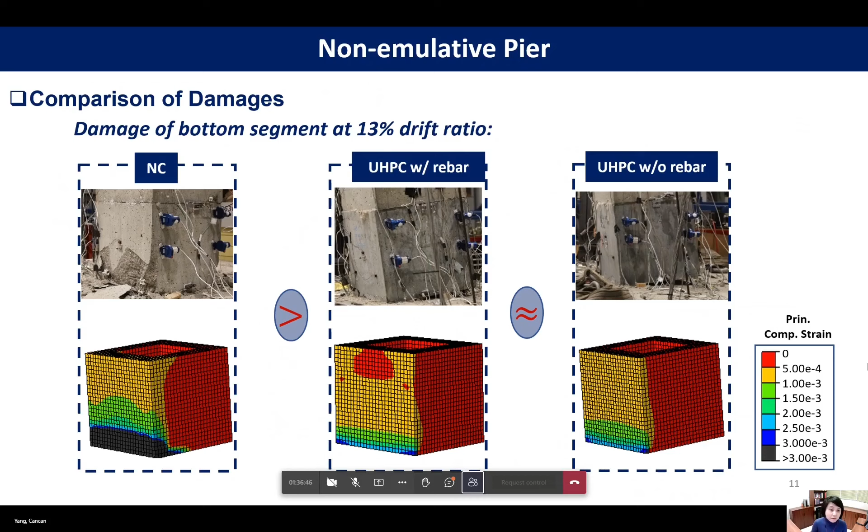If we zoom in and have a close view of the bottom segment, you will see that normal concrete has a large piece of concrete spall off, but UHPC with rebar and without rebar can both maintain the specimen in a good shape with minimal damage. This is because UHPC has a high modulus of elasticity and compression strength, which can effectively reduce the principal compression strain. So we can manage to control the concrete spalling in a very effective way.

Okay, so that's about the non-emulative pier part. For this phase of study, we rely on the enhanced mechanical properties of UHPC to mitigate earthquake-induced damage to precast concrete piers. At the beginning of my presentation, I mentioned that non-emulative pier, through developing rocking, can achieve good self-centering and also performs very well in terms of overall damage control. But the problem is that the concentrated concrete spalling and the energy dissipation is limited.

On the other hand, emulative pier can maintain the stiffness and strength very similar to a cast-in-place pier or monolithic pier. But the problem is the damage would be excessive. So from here, we are thinking maybe we can approach this problem from another angle.

We are trying to propose a new precast concrete pier system, which we call a hybrid pier. For this pier, we want to see whether it can combine the benefits of these two existing precast concrete pier systems.

Here are the research goals we set for the hybrid precast piers. This research was implemented in two phases: first, a configuration of the hybrid system was selected, and then we perform a two-tiered analysis on it to select important design parameters. Then we fabricate three hybrid pier specimens with the selected design parameters and test them under quasi-static cyclic lateral loading. We also incorporate UHPC into the hybrid pier to see whether it can mitigate the damage types specific to hybrid precast piers.

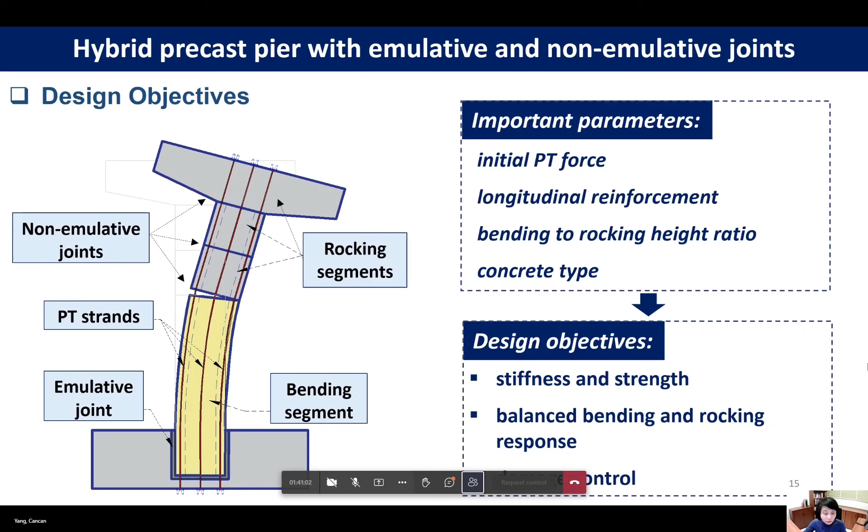A big challenge for designing these hybrid piers is that all these design parameters are not independent from each other. So here we established a series of design steps to systematically identify the optimal design variables.

The first step is to establish reliable methodologies to characterize the response of the non-emulative system and emulative system separately. Then we conduct a preliminary design to determine a viable range for variables in the hybrid pier. Once a viable range of the design variables is determined, we use the analytical model to capture the interaction between the non-emulative and emulative responses and to determine suitable values for all the design variables for a given performance metric.

For characterizing the response of the non-emulative system, we use the analytical model based on a monolithic beam analogy with the equivalent plastic hinge length. Here you can see the predicted pushover curve and also the post-tension force response were all in good agreement with the ones obtained from the test.

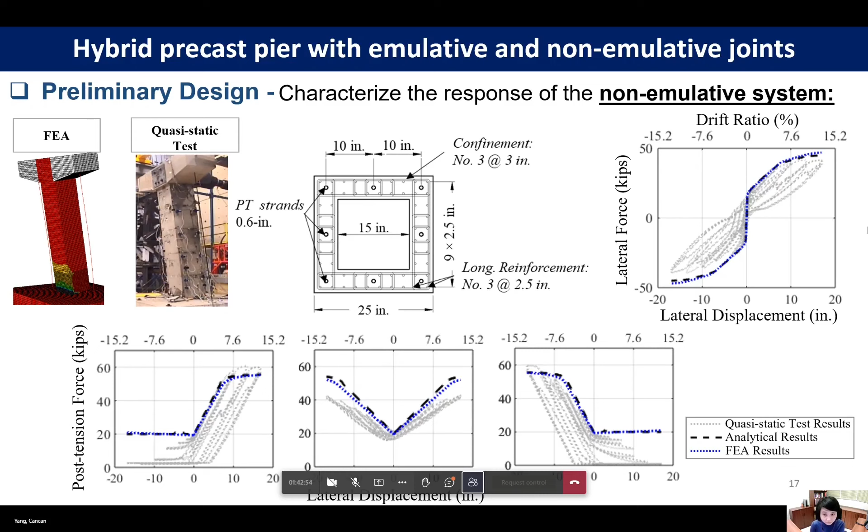So then we used the same geometry and same cross-sectional details to study an emulative system. Basically, we did a moment curvature analysis, and then we convert the moment curvature curve to a force displacement relationship at the global level.

In terms of the post-tension strand behavior, we use the displacement compatibility to capture the change in the post-tension force due to the bending deformation. Here, because we don't have the experimental data for the emulative system, we use finite element analysis results to check the accuracy of the analytical model, and we found it can predict the response reasonably well.

So with the validated model, we can proceed to the preliminary design. We worked on the relationship between the moment at the emulative and non-emulative joint, and the purpose is to ensure both rocking and bending can take place under seismic load.

So to achieve this, we set up a design rule, which is the proportionate moment at the non-emulative joint should be somewhere between the moment needed to initiate the gap opening and also smaller than the ultimate rocking moment.

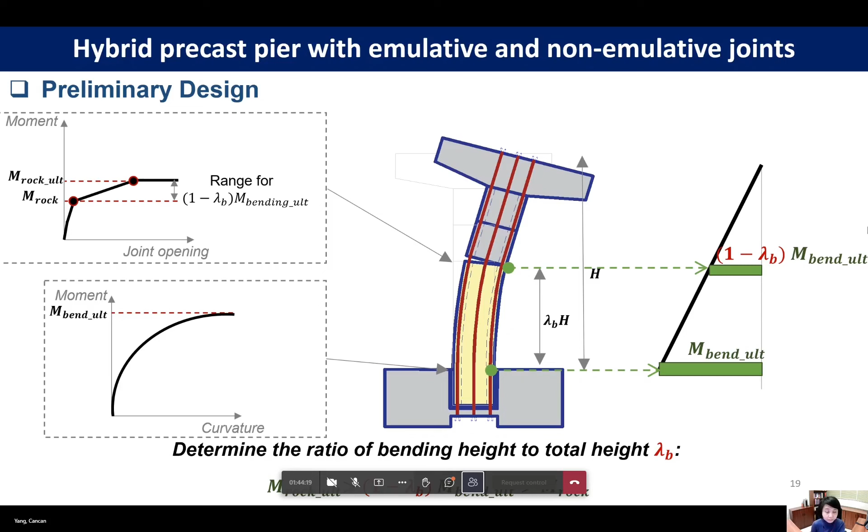So the problem is that the preliminary design method that we used previously cannot consider the interaction between rocking and bending. But rocking and bending in this system are interdependent, because both the flexural deformation and the gap opening at the rocking base will cause elongation or shortening of the post-tension strands. So what we did is establish an analytical model to capture that interdependency.

This analytical procedure starts by setting a value for the extreme compression fiber strain at the bending base, and then we do the equilibrium of the forces at the bending base to find the location of the neutral axis.

Then we can easily calculate the bending moment at the bending base, and since the moment is proportional to the height, we can easily find the moment at the rocking base, MR.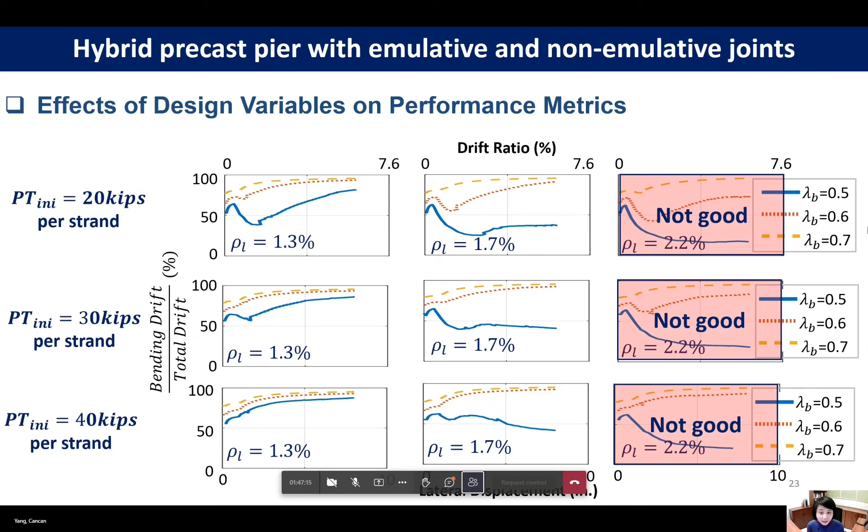The next slide is about studying how these design parameters affect the balance between bending and rocking. Here we use an indicator called the bending contribution ratio to serve as an indicator of the bending and rocking balance.

The bending contribution ratio is defined as the ratio of the drift at the top of the bending column segment over the total drift at the mid-height of the capping. Larger values of the bending contribution ratio indicate that more displacement is caused by bending as opposed to rocking. We know bending can provide energy dissipation to the hybrid system, while rocking can enable self-centering.

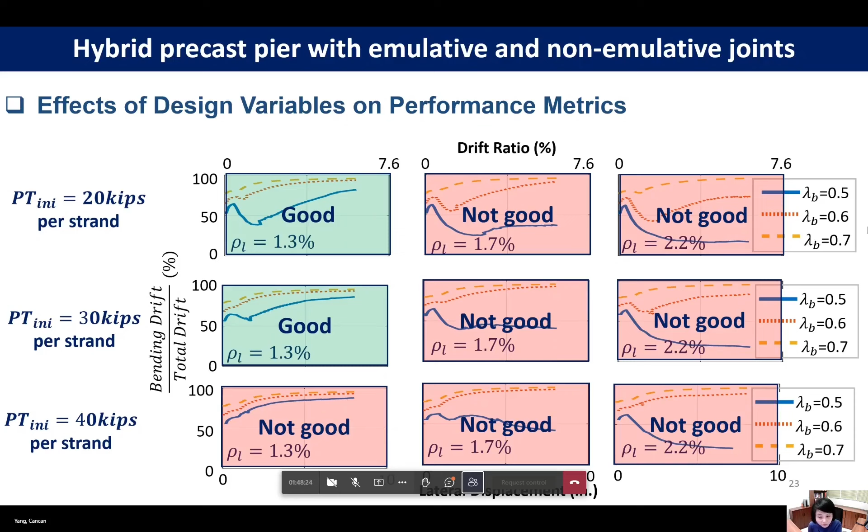What we found from this parametric study is that the bending contribution ratio decreases with the decrease in height ratio, and also decreases with an increase in the longitudinal reinforcement ratio. And the impact of the initial post-tension force is more pronounced at smaller displacement than larger displacement.

The third aspect we're investigating is the effect of design variables on damage controllability. Through rocking, we know the hybrid system can delay longitudinal rebar yielding, and this delay was less significant for higher initial post-tension forces. That's what we found here.

So finally, we selected a bending height ratio of 0.5 to 0.6 and initial post-tension force of 20 to 30 kips per strand, because they can lead to a delay in mild steel reinforcement yielding.

I've talked a lot about the design methodology, but here is how UHPC comes into this system. We use UHPC for the bending segment of this hybrid pier system to improve seismic performance, mainly because we think it will reduce concrete spalling and develop well-distributed narrow cracking, and also to enhance resistance against prying action within the foundation.

A UHPC mix was selected so that replacing normal concrete with UHPC can improve damage control, while ensuring it does not compromise the balance between bending and rocking.

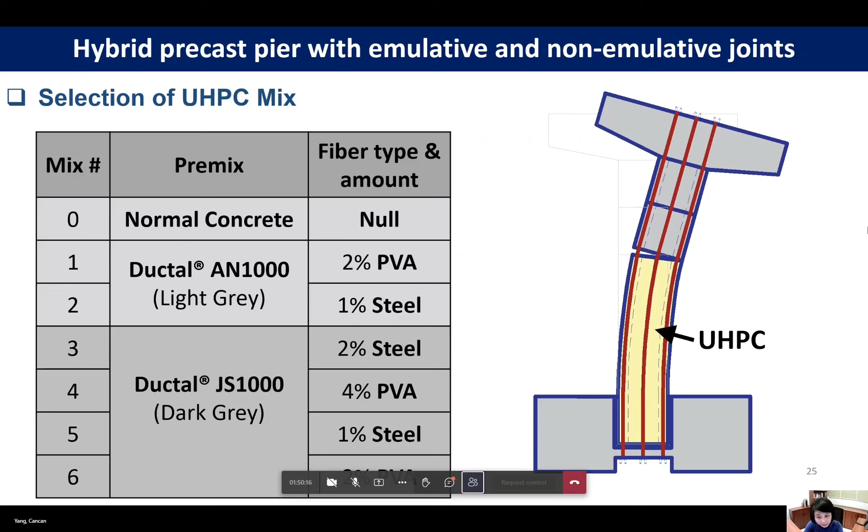For each mix, we performed a uniaxial compression test, uniaxial tension test, and 3-point bending test to characterize their material properties. I'd like to show how they perform under the 3-point bending test.

From here you'll see that, unlike normal concrete, the UHPC mixes can maintain integrity, which is due to UHPC's higher tensile toughness.

However, the bending contribution ratio could decrease as UHPC's toughness increases. What we found is that UHPC mix 1 and mix 5 were capable of maintaining the balance between bending and rocking—specifically, keeping the average bending contribution ratio at about 50%.

Our final selection was mix 1, because it had higher compression and tensile toughness than UHPC mix 5, showing greater ability for damage mitigation in the hybrid system.

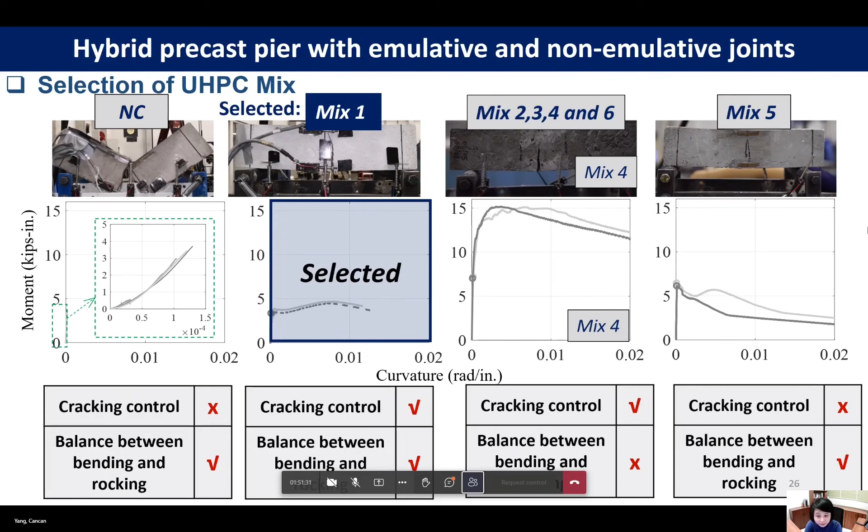So these are the finally selected design variables: initial post-tension force, longitudinal reinforcement ratio, bending-to-total-height ratio, and the UHPC type used in the bending segment. Now we can move on to the experimental demonstration part.

Here is the first specimen tested to demonstrate the hybrid pure precast pier system's performance. In this picture you can see the bending segment. The first specimen is made of normal concrete.

It was inserted into the steel bracket fixture. The steel brackets are attached to the strong floor and were designed to remain elastic throughout testing. The two steel brackets were post-tensioned to each other using 6 horizontal threaded rods, just to create contact between the pier and the bracket.

We also placed 2 steel tubes underneath the pier to provide a bearing surface, and also to create room for the strand anchorage chucks underneath the pier.

We conducted 2 sets of quasi-static cyclic tests. Test phase 1 focused on investigating damage occurring near the non-emulative joint, and test phase 2 focused on damage occurring at the emulative joint.

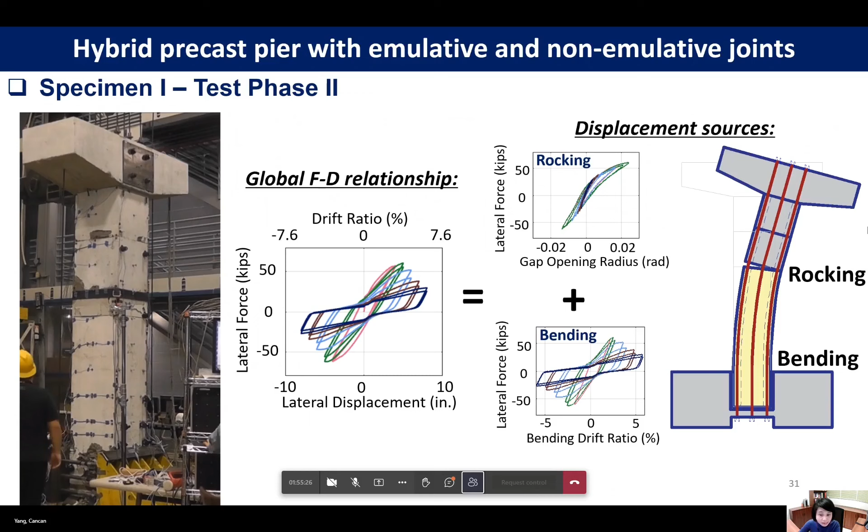So here, what we observed is that the concrete crushed within the steel bracket region when the lateral displacement reached 4.5% drift ratio, and that is because of the excessive shear cracking at this region. This is also the reason why the lateral strength decreased fast beyond 4.5% drift ratio.

In specimen 2, we replaced the normal concrete in the bending segment with UHPC, and we also did 2 sets of quasi-static tests. In the first test, we didn't put the steel jacket on because we wanted to study the rocking-induced behavior. In test phase 2, we put the jacket on to focus more on the joint. So here, let me play the video.

So here, by using UHPC, we can see the first rocking-induced cracking at the top of the bending segment occurred at a later time. We observed that at about 2.3% drift ratio, and after we observed the cracking, it quickly propagated downwards.

Compared to specimen 1, the spalling failure observed in the normal concrete bending segment near the rocking plane was definitely alleviated using UHPC. Because of this better performance, or this better damage control ability, the lateral strength consistently increased until the displacement reached about 3% drift ratio in the active direction.

After this displacement, the rocking-induced vertical cracking at the top of the bending segment propagated downwards, and that will reduce the resistance to rocking, reduce the strength, and increase the rocking displacement. So again, we put the steel jacket on and pushed the specimen to a larger displacement.

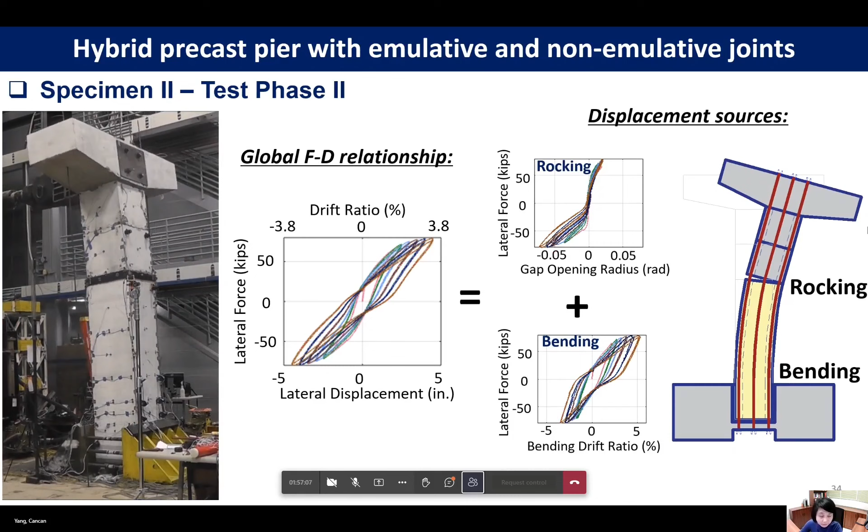So this one, we see that as lateral displacement increases, both rocking and bending response increased due to the existing damage at the non-emulative joint, and the specimen had more severe rocking-induced damage at one side compared to the other. This is because of the lack of symmetry in rocking and bending displacement.

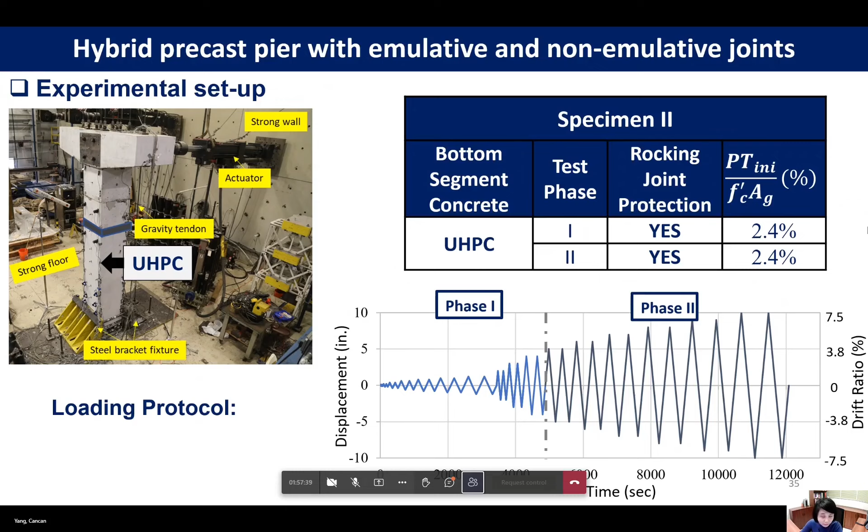In the last specimen, we had UHPC again in the bending segment, but this time we put the steel jacket on top of the bending segment for both test phase 1 and test phase 2. So then we'll see that due to the confinement provided by the steel case or steel jacket...

The damage at the top of the bending segment was limited to just hairline cracking. So then the protection of the non-emulative joint from the damage enabled this specimen to develop a very stable balance between bending and rocking displacement. The specimen had a very stable increase of lateral strength at all displacement magnitudes considered in test phase 1.

So then one more time we pushed the pier harder, and specimen 3 didn't show any additional apparent damage at the non-emulative joint beyond test phase 1. I think that's because of, again, UHPC's better mechanical properties.

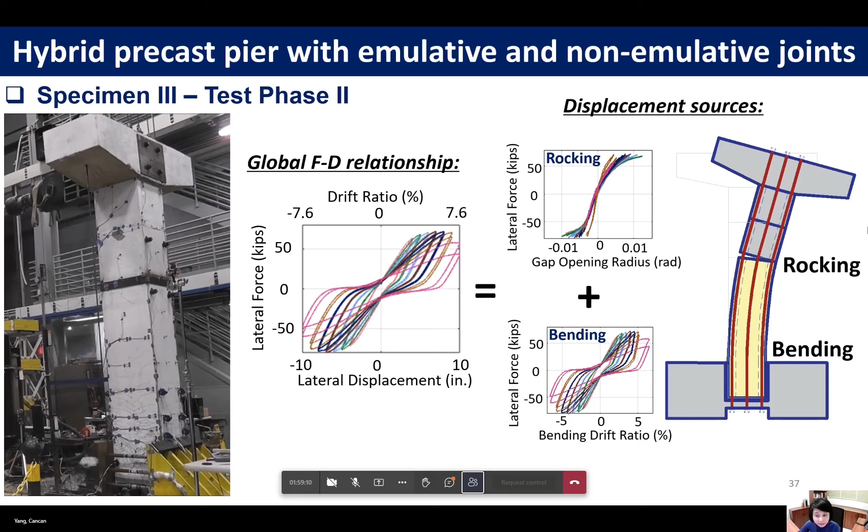So here's what we also observed: the lateral strength first dropped at 7.6% drift ratio, and that's due to the concrete shear cracking within the steel bracket. But this happened at a much larger displacement compared to the normal concrete specimen. So that makes us conclude that the damage at the joint was successfully alleviated using UHPC, and the benefit we gain from that is a delayed lateral strength degradation.

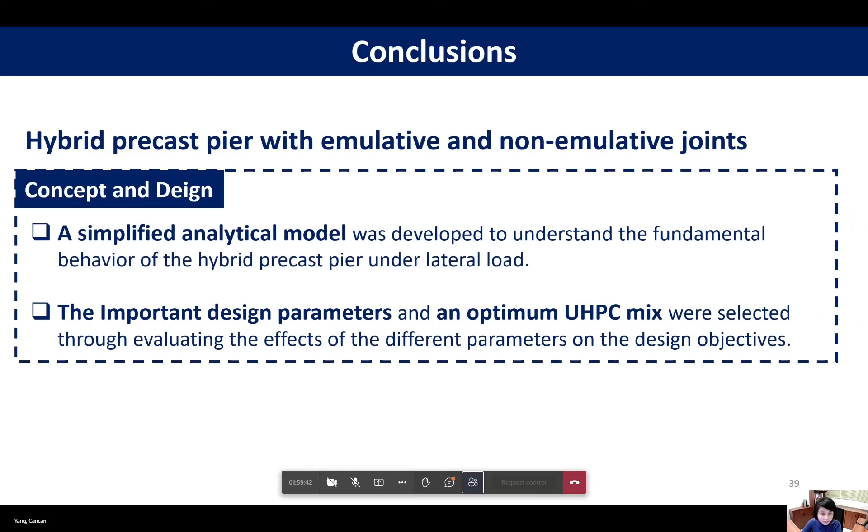Okay, so just to wrap up my presentation, for the non-emulative pier, I think our research answered this question, and we demonstrate that concrete spalling can be prevented by using UHPC, either with or without mild steel reinforcement. For the hybrid pier, we proposed an analytical model to conduct the design, and this model can also be used to select a UHPC mix to achieve the design objectives. Our experimental results also demonstrate the feasibility of this new system to achieve better seismic performance.

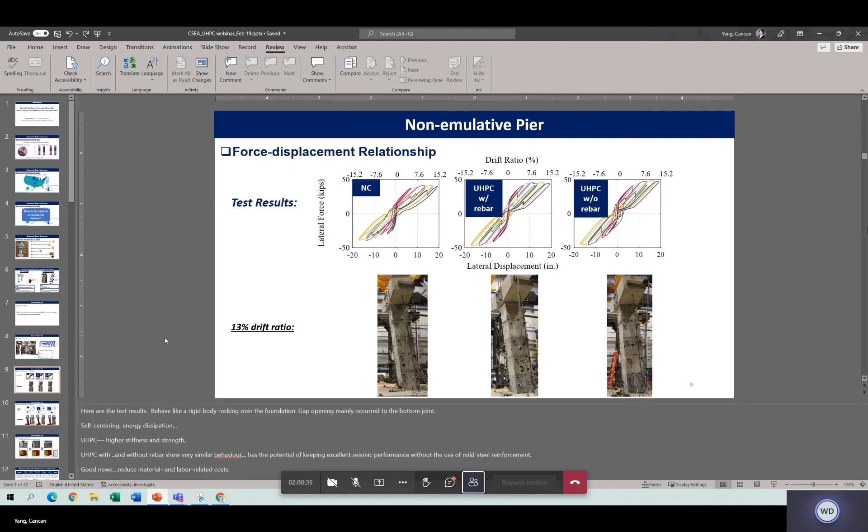So Wendy, for both of them, there's none. For example, this one, they are just hard contact between each column segment. I think this picture will show better how they are connected. So there's the interface of the column segment. You'll see the only connection is the unbonded post-tensioning strands, and there's nothing, no continuous mild steel reinforcement there.

Oh okay, yeah, there's some shear keys like a female to male. I think it will improve the performance. Might be, yes it will. Yes Wendy, you are right.

It will. The reason why we didn't include any shear key in this test is because, I didn't show it in this presentation, but another part of our research is to intentionally make them slide against each other. We want to achieve some slide, we want to achieve energy dissipation. We want to dissipate the earthquake-induced energy through their friction response. So that's why we want it.

We even, as you can see here in this picture, put some silicone at the interface to make some slippage happen at the interface, so we can rely on their frictional response to dissipate the energy.

Yeah, I think the specimen you're testing is similar to, it mimics some ramp structures for elevated structures. It has the single hammer-type single column pier, but this type of pier in our Ontario, I think, is less used.

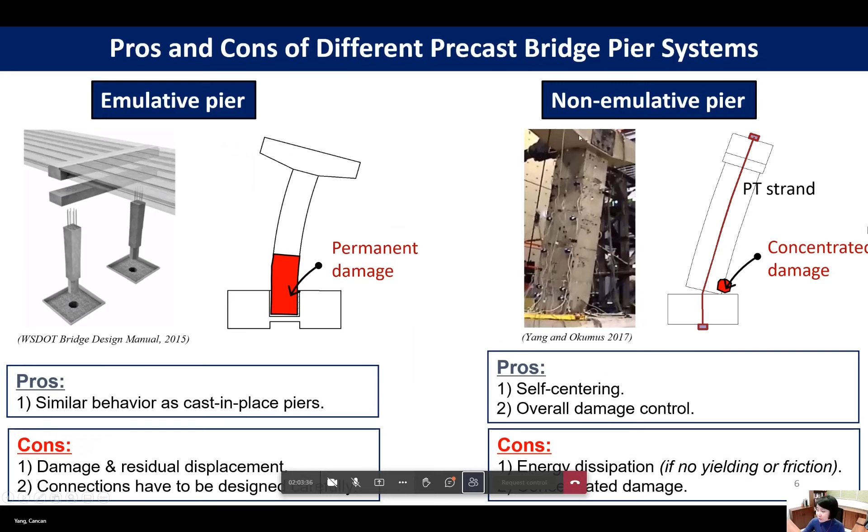but the test that I showed in this presentation, they are displacement-controlled tests. That means we actually control the displacement at the top of the pier for the loading protocol that we specified. But I want to answer your question about the integral connection with the superstructure.

So I think our argument for this system is that it will reduce, because as you can see, the stiffness is actually weakened compared to, it's kind of a weakened structure. So then under seismic loads, it will also reduce the demand on the superstructure.

Otherwise, you will have a large moment transferred from the substructure to the superstructure, and that will cause some damage to the superstructure.

And also right now, this system hasn't been studied at the whole bridge system level, so we actually have little knowledge about how this will affect other bridge components' behavior.

Yeah, okay, yeah, good start. Yeah, thank you, Wendy. I know. Later. Yeah, okay, there's another question from YL.

The title is about seismic resiliency. How do you define the concept of resiliency by the performance indicators?

Okay, yeah, are you trying to say something or? Okay, I can directly answer that. Yeah, it's a good question.

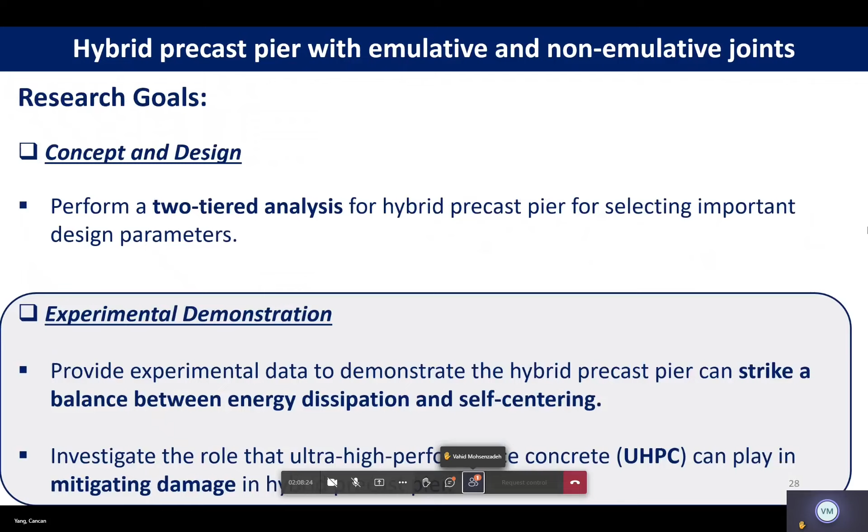Yes, I got that. I'm thinking that might be the reason the cracks are a little bit small, because you are putting a lot of compression on the hinge zone. Anyway, my next question was about your non-emulative piers. Because in Canada we don't have that much seismic demand, do you think that can be a good option for Canada? Because I saw the hysteresis loops - they didn't provide that much energy dissipation.

So I think precast concrete substructure is just less often used compared to precast concrete superstructure. Not only in Canada, I think worldwide that's the case. So we are trying to promote the use of precast concrete for substructure. Hopefully in the future we can build the whole bridge using precast concrete, which will accelerate construction time. That's the intention, that we focus on studying precast concrete substructures. But I know in practice it's not that often used right now - we typically just go with cast-in-place construction for piers or substructure.

Yes, great, I agree, thank you. Thank you. Okay, any more questions?